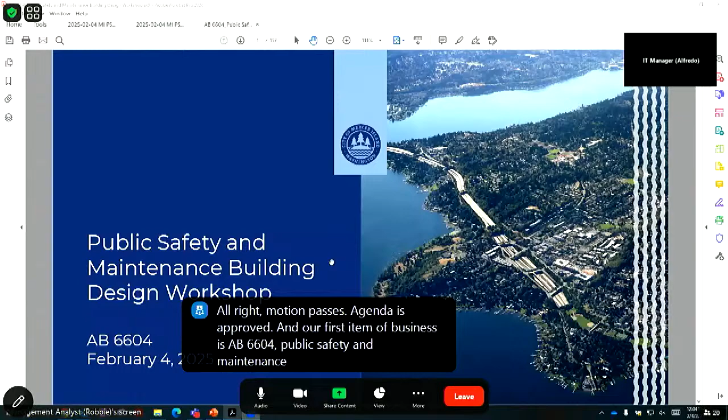Good evening, I guess good afternoon, not evening. I'm trained for council meeting hour. All right, I will ask for staff assistance in retrieving my nameplate I just dumped on the floor. Thanks, Andrea.

All right, council, it's an exciting day. We are at meeting number one discussing the public safety and maintenance facility. I'll remind you that it was just less than a year ago that you provided us direction to commence design on this facility, and here we are back at our planning session. Really excited to walk through this with you today.

I'm going to start with the background slides. Most of us have been living this intimately, including the city council, but for community members joining us today or watching this video in the future, they may not have all the history. I don't intend to go over each slide in detail, just to provide a high-level overview, but the slide deck is complete with all of the history, should anyone need it in the future.

Before I dive in, this is an interactive presentation, especially as we get into the design discussion. We'll be taking a lot of breaks. We want questions. No question is a bad question.

I'll be doing the front half of the presentation and then handing it over to our design team. I should take a moment to introduce the folks sitting here at the table. Northwest Studios is our architect team working on the public safety and maintenance facility: Aaron Young and David Cutler, who you've met previously. And to my right is Robbie Cunningham Adams, a senior management analyst in the city manager's office, and he's in charge of me and keeping the project on track. All right, shall we dive in?

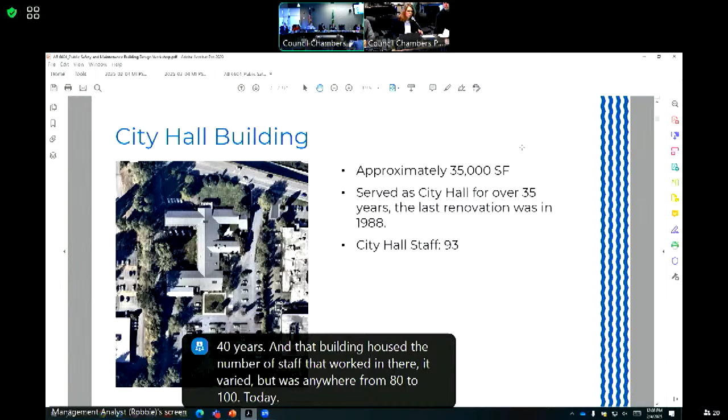The other building we'll be talking about today is the Public Works building. As a reminder, it was constructed in the early 80s for the city maintenance facilities. It's about 15,000 square feet, still in operation, and houses a variety of teams all under the umbrella of Public Works, about 64 year-round employees. During the spring and summer months, we add about 20 seasonal employees.

Over time, the city has repurposed and remodeled that building because we outgrew it pretty quickly. So for those who have toured it, you know some of the maintenance bays are office spaces now, and it isn't quite working for us for a variety of reasons.

As I started the presentation, I mentioned that we intended a nice linear phased approach to our building replacement strategies through a facility conditions assessment and a long-range plan. But it was interrupted in 2023 when we closed City Hall due to asbestos contamination.

The next set of slides are from a previous presentation. Again, I won't go through them, but I put them in the deck just for continuity.

It was in April of 2023 that we discovered some tiles that were broken in the basement of City Hall. We knew the tiles in City Hall were of the vintage that they contained asbestos. So we immediately got to work evaluating the situation and working on an abatement plan.

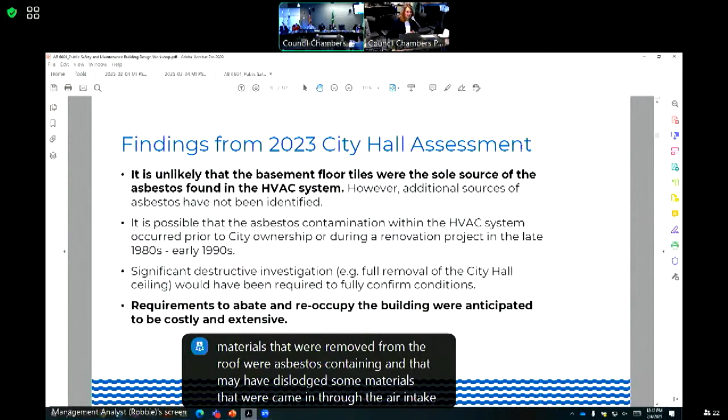That's our best guess. As you know, council, we decided not to work on this any further, although we did study it. So it's important to know when we're fielding questions about why replace City Hall.

We looked at 2 scenarios to reoccupy City Hall. The first was to abate and reoccupy the full building, and the second was to abate and just reoccupy the police wing.

When we met with you in 2023 to review these alternatives, we stopped estimating. We knew the full reoccupancy of City Hall was starting at 10 million, and it was likely going to be higher. The full HVAC system would have had to come out, ceilings replaced, electrical and more. We also looked at just reoccupying the police wing, and again the cost estimate was starting at 4 million and we thought it was probably going to go up. So we made the decision not to pursue that.

In fact, it was in October 2023 that you all directed the permanent closure of City Hall. This slide summarizes why that decision was made. It's important to remind ourselves it was not just the asbestos contamination, although that was the tipping point. City Hall is an aging facility with structural issues. It is not a resilient building that would make it through a substantial earthquake. In fact, all of the interior walls had been identified as lacking bracing, and unless reinforced, would be at risk during an earthquake. So with all of that, that was the moment we decided to move in another direction. I thank you for your leadership on that. This has not been an easy time for us, losing City Hall, but this was the right decision.

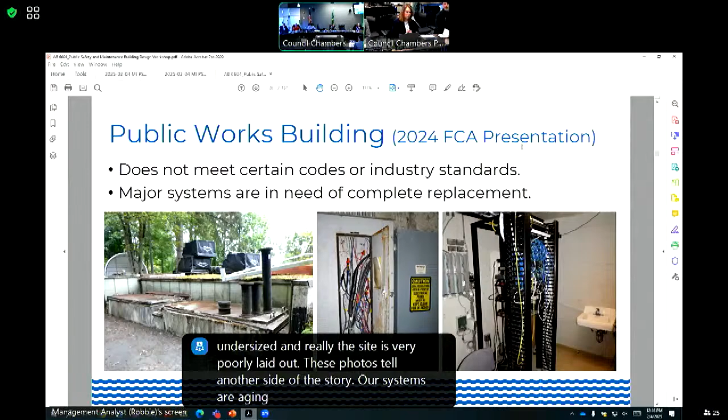These photos tell another side of the story. Our systems are aging. HVAC, electrical in this building are not up to standards, and in some cases we're not meeting code.

For those of you that have walked the site with us, I think all of you have been to the site within the last year. You know that the layout is poor, it's cramped, it's not efficient. We have a lot of major assets at this site that we use to keep our critical and essential functions running, including some pretty big rigs that we don't have anywhere to park. We'll talk more about that in a minute.

Perhaps one of the bigger problems on this building is the green roof that is leaking and compromising the structure. In fact, on your agenda tonight, we'll be asking you to approve a contract to do some of the interim work on this building. Also consistent with City Hall are the seismic risks. These are the buildings we rely on during emergencies, and neither City Hall nor Public Works were built to the standards of today. We'll talk more about a level 4 building in just a minute.

Based on these findings, it was last year, March, that we presented all of this information to you, and you directed us to prioritize the Public Works Building for replacement. So that is what brought us to today. We've combined the functions, both Public Works and Police, and a few others, to be incorporated into a new proposed public safety and maintenance facility. We love our acronyms in government, so you know we call it the PSM. We'll continue to use that.

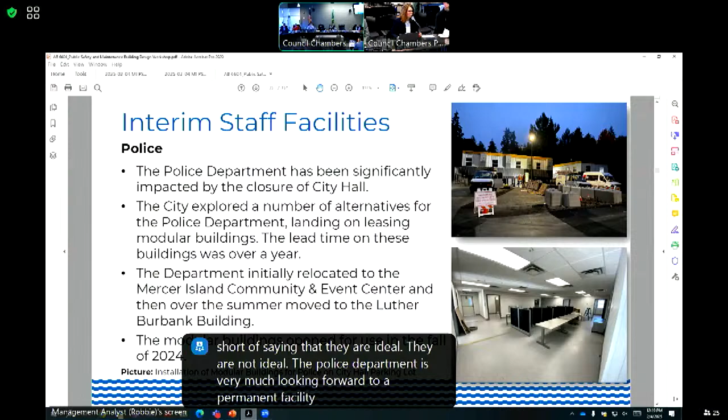Those buildings took over a year to get. They had a very long lead time, but they were fully operational for use in the fall of 2024. While these are working, I will stop short of saying that they are ideal. They are not ideal. The police department is very much looking forward to a permanent facility, and I'm sure they will all be watching our presentation today.

Municipal Court - originally when City Hall closed, we leased space in Kirkland temporarily, and then we found a more permanent location at the City of Newcastle City Hall, where we anticipate they will be for the duration. I want to thank both the City of Kirkland and the City of Newcastle for helping us out during this time.

Council chambers, I probably don't need to say much about that. We are in our council chambers now, the Slater Room at the community center. And as I mentioned a moment ago, the Public Works building - having lost City Hall, we made the decision in July to perform some interim repairs on the Public Works building so that we could extend the life for 5 to 7 years. There were, simply put, some things that could not be ignored. Your review and approval of the bid award is on the agenda for tonight's City Council meeting.

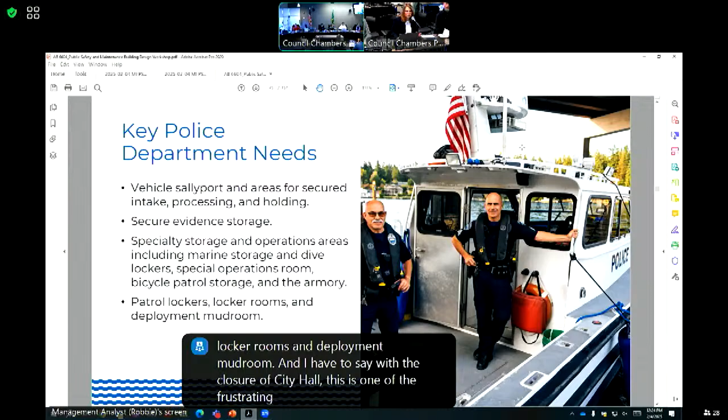Patrol lockers, locker rooms, and deployment mudroom. And I have to say, with the closure of City Hall, this is one of the most frustrating areas for police, is that the space to change and shower is not ideal.

Switching gears here to Public Works, and by the way, these are high-level summaries, I'm not providing you with every detail. Currently, in our Public Works building, we house engineering, the capital project team, parts of Parks and Recreation, our utility teams, our right-of-way teams, stormwater, support services, which includes facilities, and all of our seasonal Public Works members. In the new PSM building, we're intending to house most of that list, with the exception of engineering and capital projects. Those teams, which have more of an administrative function, may be housed in a different location.

So we're planning for workspaces and support areas for about 80 Public Works employees in the new PSM building. In the main building itself, that means offices, meeting rooms, lunch areas, conference rooms. I should heavily emphasize that. We need conference rooms and meeting rooms.

Storage, another huge need with Public Works, primarily in the yard. Similar needs for locker rooms, mud rooms, and cleanup rooms for field staff. We want them to be able to come in from the field, shower, change, and also have laundry facilities available.

Something that not everyone is aware of: at City Hall, we had spaces for people to sleep overnight. When we're responding to emergencies, even just snow and ice, our teams need to sleep here. We need them to take a break, and sometimes it makes more sense for them to do that than to travel home. We are often running 24/7 during an emergency response. So the new PSM building will include sleeping rooms for our staff that can be used for both maintenance and police.

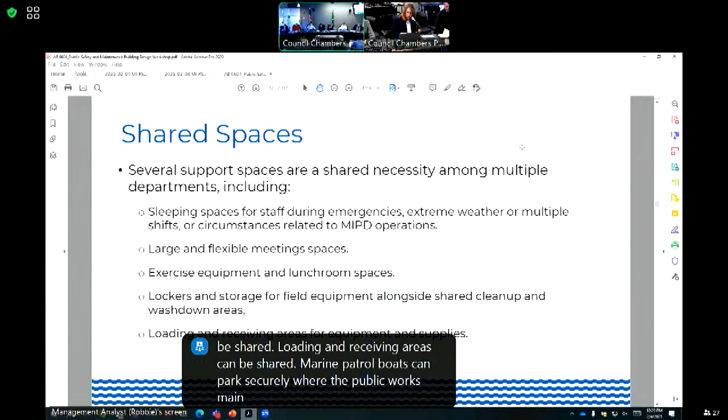Shared spaces - I'm not going to go into this in detail, we should talk about it with our Northwest Studio team in a moment. The efficiency of designing this building is identifying where Public Works and police can share spaces, though there are some circumstances where that isn't practical or efficient. Things like laundry rooms, mudrooms, locker rooms, and big kitchens can be shared. Loading and receiving areas can be shared. Marine Patrol boats can park securely where the Public Works main equipment is parked as well. So lots of opportunities for efficiencies.

I'm not going to dive into this a whole lot, we'll leave it to Northwest Studio. Just remember, we're designing this building to risk category 4, one of the most resilient, hardy ways we can build, because this building needs to be operational in the event of an earthquake. Our current facilities are level 2, maybe.

So with that, we completed all of our pre-design work in the summer of 2024, and we transitioned to what we're calling the schematic design phase, which is where we really start to put details to the plan sets, and the building and site start to take shape.

I noted here that during this process, I identified and am recommending that the customer service team be included in this building. We do not have a plan for another new building that would provide that storefront. Council, I know you've been hearing from the community asking where do we go - there's no place for someone to easily walk in and have access to all city services. So we've added a customer service counter, which was already planned for the building, but we're proposing to make it a little bigger so our customer service team can be housed here as well. There are efficiencies with doing that, because they can also serve as the main customer service desk for maintenance functions.

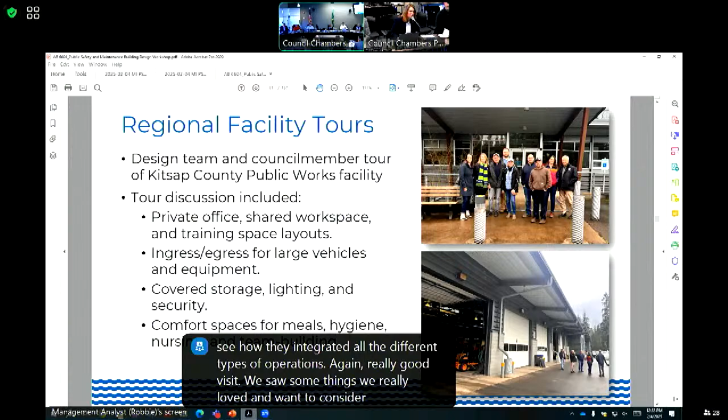Last month, we drove to Kitsap County Public Works Facility, and Councilmember Anderl and Councilmember Jacobson joined us - thank you for that. We chose that facility because first of all, it's very large, much larger than our own will be, but also many of their public works functions are housed at that facility, so we wanted to see how they integrated all the different types of operations. Again, really good visit - we saw some things we really loved and want to consider, and they gave us some lessons learned about their building.

And as I just mentioned, it might not seem obvious that we've been touring our own facility, but we've been going over the Public Works Building and City Hall campus with a fine-tooth comb and talking to the staff teams, really understanding operational flows and what's working and what's not working, and that was all incorporated into our design.

And many design meetings. As we started to see drafts of the facilities, we've been meeting again with the staff, and there will be another iteration with the staff in February and March. After today's meeting, we go back to the staff and walk through the design sets with them and get their feedback.

I guess this is just one of the final wrap-up slides here. I think it's very important for the council, the community, and the internal staff teams to know that what's being discussed today is not final. For those of you who've been involved in major construction, you know there's going to be a lot of changes along the way, not just over the next few months, but even in the next 12 to 18 months.

Next steps and timeline, I'll mention this quickly. This is our first touch with you, City Council. We're tentatively anticipating seeing you once a month, probably through June and July, as we work to finish schematic design. We do want to take this out on a roadshow. Even though most of what's in this building is internal operations, it's really important that the community understands what's proposed here, and we have an opportunity to get their feedback. That's the timeline for community engagement, March and April, and we'll be talking more with you about that.

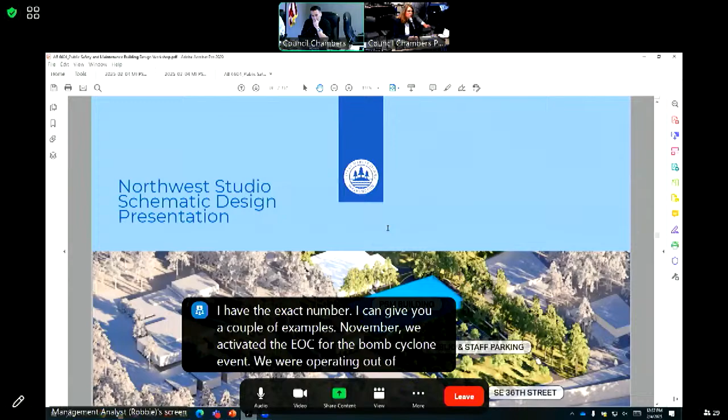November, we activated the EOC for the bomb cyclone event. We were operating out of this room for 7 days. That's the most recent. Last spring, when we were dealing with the water supply pipeline emergency, the EOC was activated. We were working here for weeks on end in that response.

Those are the two most recent major ones, but we're standing up our EOC, unfortunately, several times a year. Well, sadly, I've been here almost 8 years, and so I'm thinking back to the pandemic. The EOC was active for, was it more than a year? Yeah, and that allowed us to consolidate all of our communications, points of entry, allocate costs. So that was a pretty significant lift.

That's correct. Councilmember Wyberg. Yeah, so I'm trying to think 2 or 3 generations in the future, because the building that we construct, we want to have last for 50 to 100 years. And with the recent housing and density legislation and the expected increases in population on the island in the coming decades, was the expandability of the facility part of the design intent, like the ability to add a 3rd floor in the future, for example, or the ability to make the space larger than what it currently is, or was that a factor in the design so far?

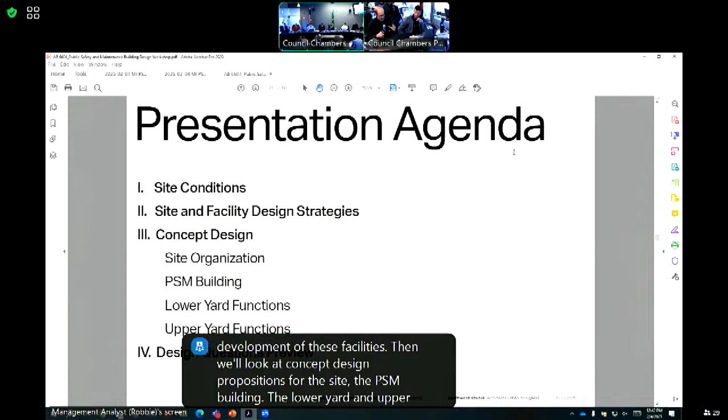We're going to talk about 4 basic categories of content today. The first is just an overview of site conditions. The second will be taking those site conditions and using them to talk about a series of site and facility design strategies that help guide us as we think about the physical development of these facilities. Then we'll look at concept design propositions for the site, the PSM building, the lower yard and upper yard functions, and those divisions will begin to make sense as we walk through the presentation. Then we have a series of questions we'd like to pose, coming out of our investigations that dovetail with potential future resiliency or environmental options.

On this current site, there are quite a lot of facilities, including the former City Hall on the north and parking for everyone coming to and operating on these sites. Currently, some of that parking has been occupied by temporary facilities for the Mercer Island Police Department.

The lower yard contains the decant facility, vehicle wash areas, raw materials, organics, and waste bins. The Public Works building itself, as Jesse mentioned, is now really full with staff offices and former maintenance shop areas and bays.

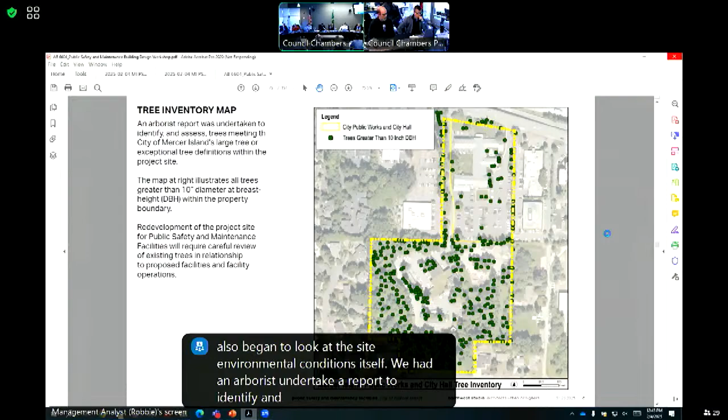As we started studying this, we also began to look at the site environmental conditions. We had an arborist undertake a report to identify and assess trees on the site, and this map illustrates all trees greater than 10-inch diameter at breast height within the property boundary. As we step forward, we'll require a careful review of these existing trees in relationship to any proposed facilities on the site.

Sorry, having a little delay here.

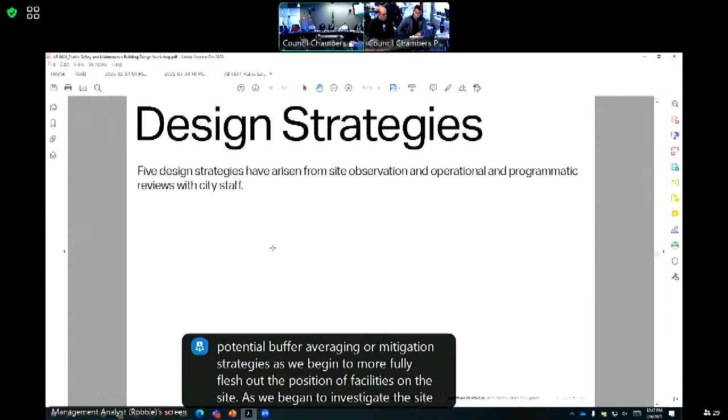As we began to investigate the site with city staff, 5 design strategies emerged from the site observations and from operational and programmatic reviews with city staff.

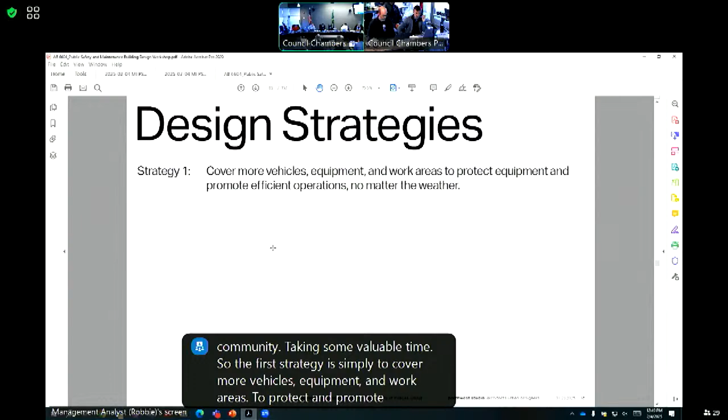Now, just as a recap, the existing public works yard, including these vehicles, are mostly uncovered and unprotected. New areas should be covered so that we can protect those assets and promote efficient operations. But that covering also begins to double as roof structure so that we can organize new facilities for efficient flow between interior and exterior operational areas.

Which leads us to the second strategy, which is co-locating buildings with covered areas for operational efficiency and cost effectiveness, leveraging that weathering cover for building roof structures and to promote efficiency indoors and outdoors.

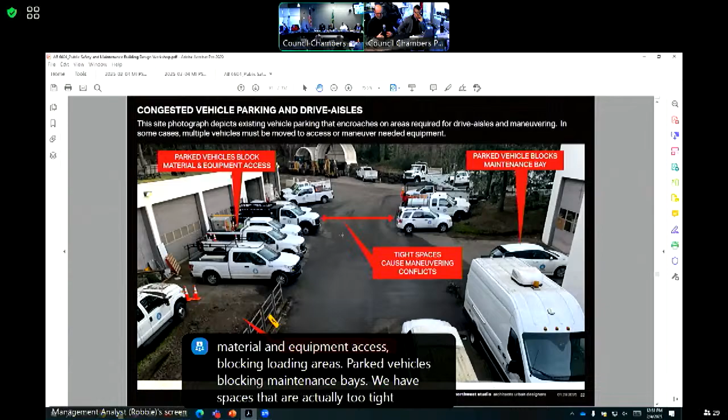If we look at a photograph of those conditions taken from the roof of the Public Works warehouse, what we can see is a really congested condition with vehicle parking and drive aisles kind of blocked. We have parked vehicles blocking material and equipment access, blocking loading areas, parked vehicles blocking maintenance bays. We have spaces that are actually too tight for maneuverability and turnaround for ingress and egress. So oftentimes a vehicle has to be moved before other vehicles can simply be used.

That, paired with the existing two-way circulation, creates quite a number of conflicts throughout the site. The two-way circulation with the ad hoc vehicle parking and the access requirements to stored equipment results in these conflicts which impact daily operations and take time when maneuvering in and out of the site.

I think it's important to return to one of the questions that was posed about the volume of operations daily, and it's important to note that the majority of the Public Works field staff are really in and out with vehicles about 3 times a day, once in the morning, once at lunch, and once in the afternoon. Have 60 to 80 people all maneuvering in vehicles around each other to try to get in and out to operations.

Simplifying vehicular circulation could be one step that helps. And one way to do that is looking towards one-way circulation rather than two-way. Nowhere is this efficiency better seen than in comparing intersections.

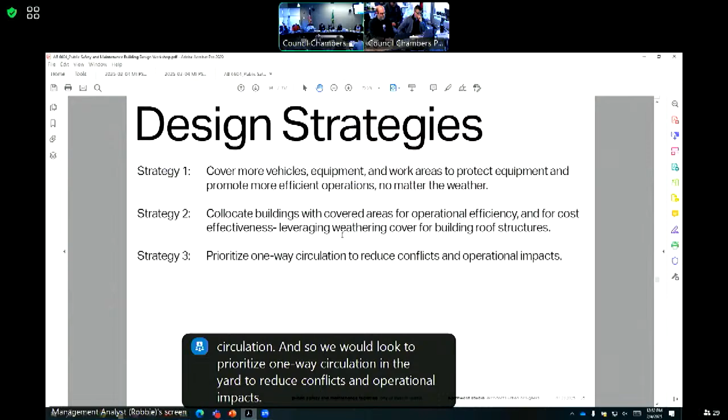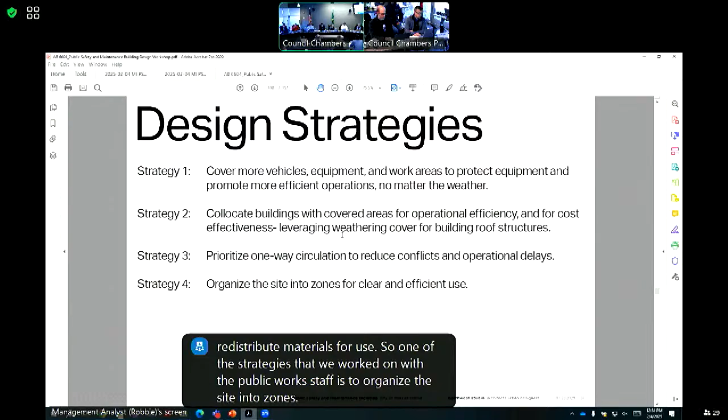Now, the Public Safety and Maintenance Facilities Program includes, we said 5 critical departments, but there are really 4 groups: the Mercer Island Police Department, the Emergency Operations Center, Public Works, and IT and GIS departments, and customer service functions. These departments have requirements that overlap and offer opportunities for shared facilities to maximize functionality and minimize the square footages required to help reduce costs of the facilities.

So organizing the PSM building, just like the yard, into functional zones so that we can dovetail with overall site design strategies and organize these building uses into clear relationships with one another, to the public access and to the yard to the south.

So the final strategy that we looked at was organizing the buildings as well as the yard into zones that maximize the use of shared spaces and promote efficient operations for staff and create clearly accessible spaces for public services.

All right, I think we'll pause there and see if there's any questions on existing conditions or the design strategies.

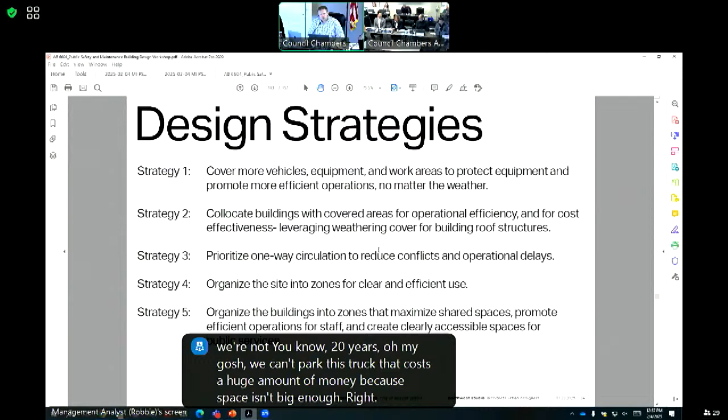Right, Jason, are you on? Actually, do you mind stopping screen sharing right now? Hi Jason, Jason is home in sick land. Thank you for joining us. Jason, can you talk a little bit about the future of our fleet, what's known and what's not known?

In terms of our fleet size, the size of the equipment itself, I don't anticipate getting larger. The size that we have is given the physical constraints of the island, the topography, and some of the challenges we have with the location of our utilities. Larger vehicles don't actually help us in a lot of ways because of the challenges we have to face with our existing conditions on the island. So that said, the trucks that we have are probably about as large as we anticipate getting, because we're not going to add to the size of our city.

We're not going to annex in elsewhere and things like that, so I'm confident in saying the size of the equipment we have suits our needs. I could anticipate it getting smaller or more compact. You could add other elements like trailers, but that wouldn't necessarily impact the height requirement of the vehicles. There's also WSDOT standards and requirements in terms of the size of vehicles and limitations associated to it, which this design team is taking into consideration. So I don't anticipate those changing over the course of the next 20 or 30 years. As far as our fleet goes, I think we're at the max size vehicles we have, and ideally we'd probably get a little smaller in some vehicles if possible.

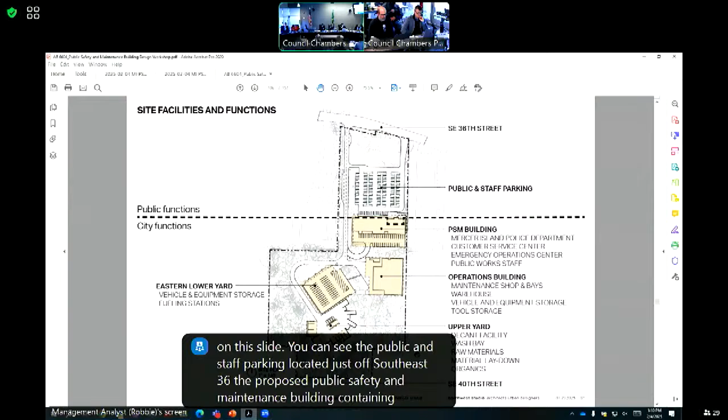You can see the public and staff parking located just off Southeast 36th, and the proposed public safety and maintenance building containing the Mercer Island Police Department, Customer Service Center, Emergency Operations Center, and Public Works staff, along with the secure functions for the MIPD.

Just south of that is what we're calling the operations building, which has the maintenance shop and bays, warehouse, primary location for equipment and tool storage, along with covered, enclosed, and heated vehicle storage. Across the stream is what we're calling the eastern lower yard, primarily covered but open vehicle and equipment storage, along with fueling stations for diesel, unleaded, and propane.

And then just to the south of that, up the hill, is the upper yard, which would locate the decant facility, a wash bay, raw material storage, material laydown, and organics and waste.

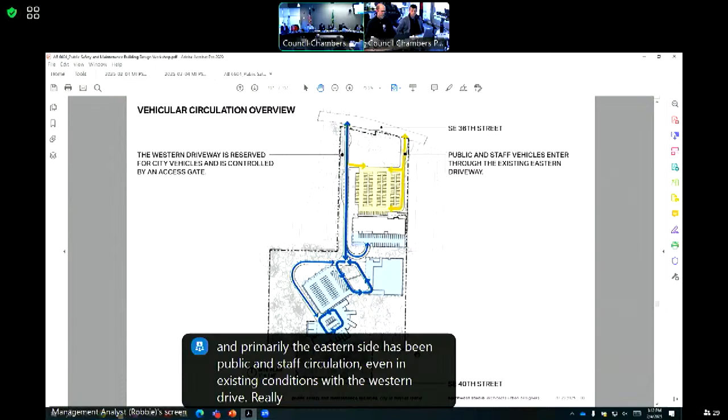Now, vehicular circulation, which we touched on in the site conditions, is a particular item to pay attention to. The current site has two ways in and out along Southeast 36th, and primarily the eastern side has been public and staff circulation, even in existing conditions, with the western drive really dedicated for city vehicles. We propose maintaining that and dedicating and reserving those for each of those functions, and I'm going to walk through that.

For public and staff vehicle circulation, on the eastern side of the site is the primary entrance to arrive at a public parking lot with clear access to the PSM building and customer service entries. This parking lot includes approximately 120 spaces, with the balance of code-required parking located elsewhere on the site.

The western driveway, though it's reserved for city vehicles, is controlled by an access gate just south of the arrow that turns right there. A diversion lane is located on the inbound lane, because if you're like me, you're going to go in that driveway on accident, and you're going to need a way to get to the public parking lot without having to back up or interrupt public works operations.

City vehicle circulation would ingress and egress on the western side, on the Southeast 36th Street driveway. This is a two-way drive aisle that guides vehicles from Southeast 36 into the project site. That drive aisle is anticipated to have an inbound lay-by lane to assist Public Works in managing potential queuing during high-volume times for deliveries or vehicle traffic.

As you can see in this diagram, once onto the Public Works yard, circulation moves in a one-way loop used to manage circulation between the eastern and western halves of that lower yard, with two-way circulation to the upper yard, again operating on a one-way loop. We'll look at that in more detail as we zoom into each of the plans later in the presentation.

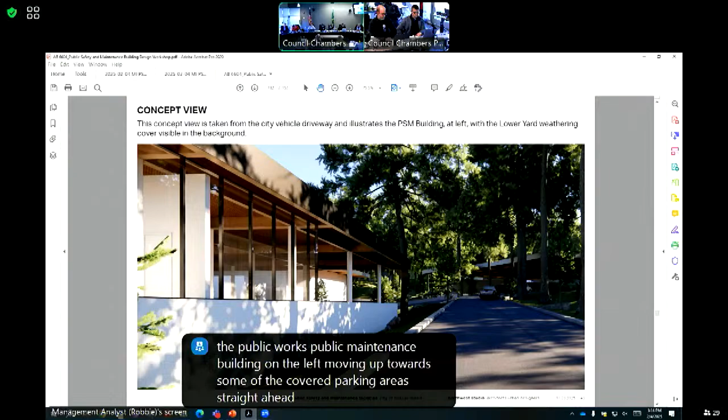The Public Safety and Maintenance Building has a pretty diverse program. It occupies, as currently planned, about 36,000 gross square feet on 2 floors. These include the Mercer Island Police Department, which occupies about 16,600 gross square feet, and the Emergency Operations Center, which utilizes about 5,600 gross square feet.

Public Works, IT, and GIS combine for about 10,000 gross square feet. Customer service, public counters, and staff areas are about 6,300 square feet. And a very large group of shared spaces is about 12,000 square feet. Now, if you're doing the math, you'll note that that adds up to way more than 36,000 square feet. It adds up to more than that because we've been able to work with all of the groups to plan the overlap in a lot of spaces, how they can share these spaces to reduce the size of the overall building. We'll walk through that as we go through the plans.

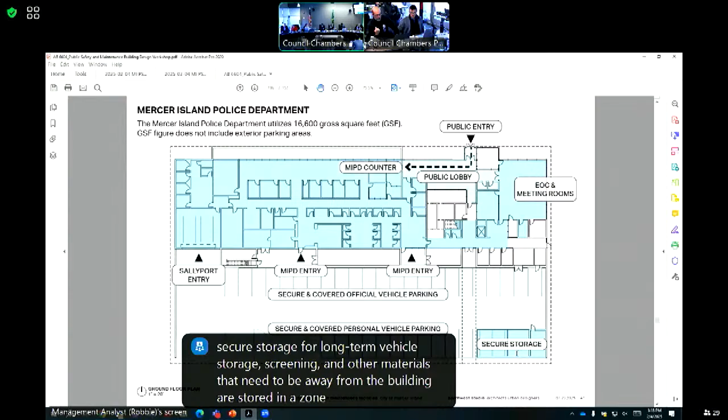The bulk of MIPD staff dedicated entries are on the southern side off of the secure and covered vehicle parking areas, with Sallyport entries on the west and staff and pedestrian entries on the middle and to the east. Other secure storage for long-term vehicle storage, screening, and other materials that need to be away from the building are stored in a zone on the southeastern corner of this building.

Looking at the Emergency Operations Center, you can begin to see some of the overlap. The primary EOC room is located on the northeast corner of the building, right off of the public lobby. We'll look at the other functions for that room in a moment, but it is surrounded by small conference, large conference rooms, call centers, storage areas, support stations, ham radio facilities, and staff entries and secure entries at various points around the building to promote an efficient flow of operations.

The customer service center and city staff areas utilize many of the same spaces because though the EOC sees a lot of use, it is not in operation all the time, hopefully increasingly less. That room becomes available for staff meetings, potential training, volunteer training related to EOC activities, and other operations for the customer service center.

The shared workspaces on this floor really overlap with a lot of these same areas, with EOC doubling as meeting and training rooms, small and large conference areas being used by city staff and MIPD throughout the building, storage areas for all of that staff, workrooms, and vertical circulation.

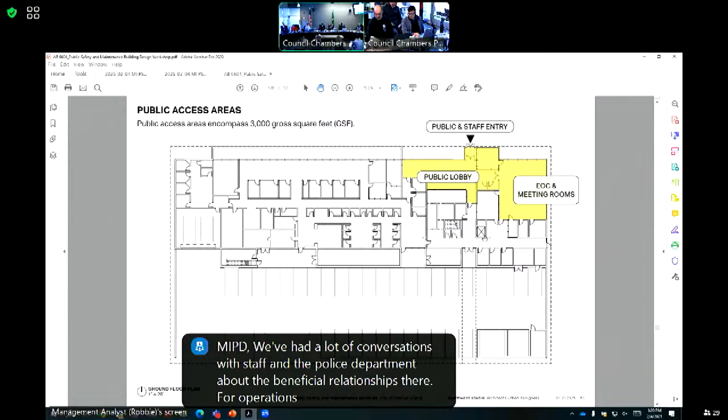One final diagram illustrates the public access areas of the building, from the public entry on the north through to a small conference room, the EOC room for potential volunteer training or other activities, and the public lobby itself, which is shared between customer service and MIPD. We've had a lot of conversations with staff and the police department about the beneficial relationships there for operations, and a public lobby that's also big enough to host necessary computer stations and work tables that would enable staff to have small meetings with applicants for questions.

As we move up to the second floor, we can see that this floor is primarily occupied by offices and collaboration spaces on the western side, with shared workplace facilities located directly above the central stair, an elevator, and vertical circulation in the building.

This floor is connected by a walkway across the parking area below to the Public Works yard to the south. The second floor of this building is approximately at the same grade elevation as the Public Works operations building to the south, so this enables Public Works staff to walk directly out of the building and move over towards the Public Works yard.

That western third, or two-thirds of the building, is really being occupied by open offices and collaboration spaces primarily, with select private offices and enclosed meeting spaces occupying the middle of the building, with IT, GIS, server rooms, storage, and supply rooms located to the east.

Primary staff entry to and from the Public Works yard is located around the shared workspaces. That staff entry is located with meetings, lunch, and break areas really occupying the middle of the shared workspace zone, with the eastern side of the building occupied by the nuts and bolts of the shared workspaces, which are the equipment lockers, sleep rooms, cleanup spaces, mud rooms, laundry, restrooms, changing rooms, showers, all the things that Public Works staff need to operate on a daily basis with the equipment.

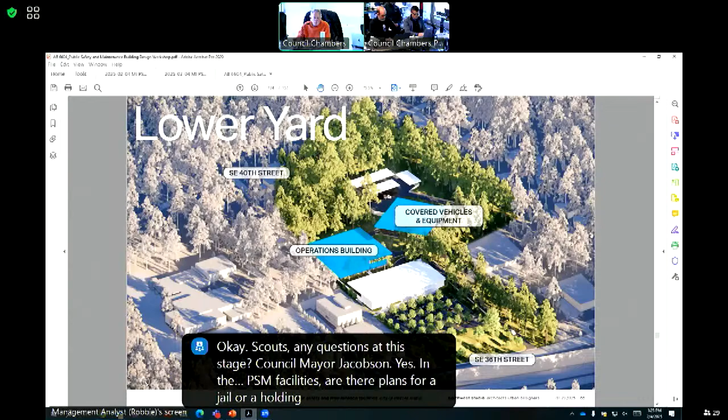Councilmember Jacobson. Yes, in the PSM facility, are there plans for a jail or a holding area? Let's maybe flip back, we don't have all the spaces labeled here.

There we go. And the chief is here too. So Chief, if you want to kick Robbie out of his seat, or Robbie, I'll bring you the mic. So I can have Aaron show, we can have the chief talk about how we handle in-custody flow through the Sally Port.

Northwest Studios, do you want to point out where the holding cells are right now? The holding cells and processing are located in the northwestern corner of the building, where my cursor is currently, with the Sally Port located directly to the south of that. And Chief, did you want to say anything about how that is intended to function together?

Sure. The purpose of the holding cells is really just temporary, to process an in-custody arrest, possibly photograph, fingerprint, DUI processing, et cetera, or further interviews. So persons would be brought through the Sally Port, which is a secure entry point, into the top left corner area, which would be a series of secure holding cell rooms and a hard interview room where detectives or officers could interview those persons as needed. And then when we're done processing, they're transported to whatever jail we're housing them at.

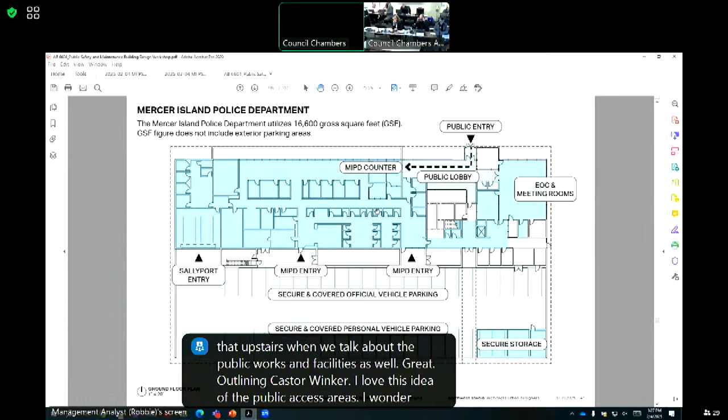Great. Councilmember Weiker. I love this idea of the public access areas. So I wonder if you could speak a little more to, A, how flexible that space is, and B, how important it is for any number of reasons we would need that space going forward. I think that's a fantastic addition.

So, good question. I think you've gleaned from the presentation this is largely an internal operations facility, and the security of the building and the yard and the vehicles is of utmost importance. But it is a public facility, and allowing it to be used in some ways for community use, I also think is very important.

The EOC space, we moved it to the front of the building, and the EOC will be built so that in a moment's notice, we can all arrive, pull out our equipment and supplies, and be ready to go. It will likely not be set up as an EOC permanently because we don't need to use it all the time. However, if Amanda Cavercamp was here, she would say, Jesse, wait a minute, I need to use it for trainings, and that's exactly what it's intended to be: flexible.

So we'll be using it for volunteer training. We would also likely make it available for community use, with the understanding that if you book here, we may have to bump you out if we have an emergency. But that is all going to be designed so that you can come into the EOC. There's restroom facilities, and I won't call it a kitchen, but some limited refreshment stations, so that a community group could be here, have access to those facilities, and not have access to the rest of the building.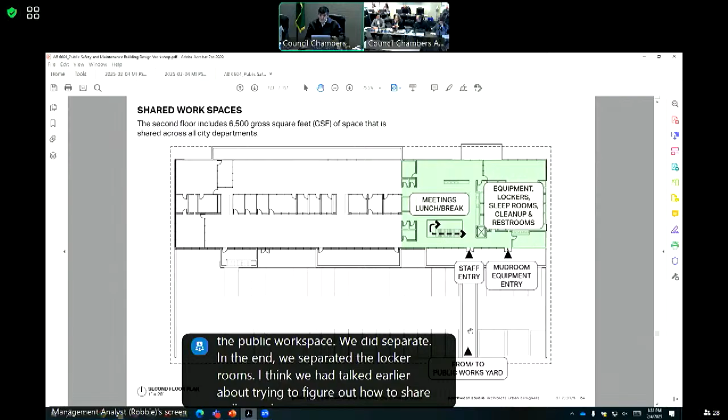We did separate, in the end, the locker rooms. I think we had talked earlier about trying to figure out how to share police and Public Works. There's some practical challenges with that, particularly our officers having to remove and securely handle things like gun belts. So for right now, that's split, but what's shared here is the sleeping rooms. So if for some reason one of our police personnel needed to spend the night in the building, that is a shared space. I hope that covered it.

Yeah, so I think you guys covered it. The source of the question, I guess, when people are coming across from the Public Works yard and into a mudroom, I presume that means there'll still be some debris that needs to be cleared off, which means there's going to be some of it getting on that bridge.

And when we clear off that bridge, it's going to be, unless we have nice drainage around there collecting that, dripping down onto the police vehicles. So I'm just trying to make sure that we're thinking about the Z factor and what's underneath there.

That's a great comment. I will say the finishes on the building, we're far from that, but this building is designed to be very utility in nature. We know particularly the Public Works crew, with all due respect to them, are messy and they're coming from the field. We want to make sure we can clean up easily. So this type of carpeting will probably not be found in very many places in the building.

Okay, thank you. Deputy Mayor Rosenbaum.

My question was about how the police segment was designed in terms of, was it a comparison to other facilities or to similar size? But it sounds like that there's more to come on that after the next touch, so maybe I'll just check back in a few weeks.

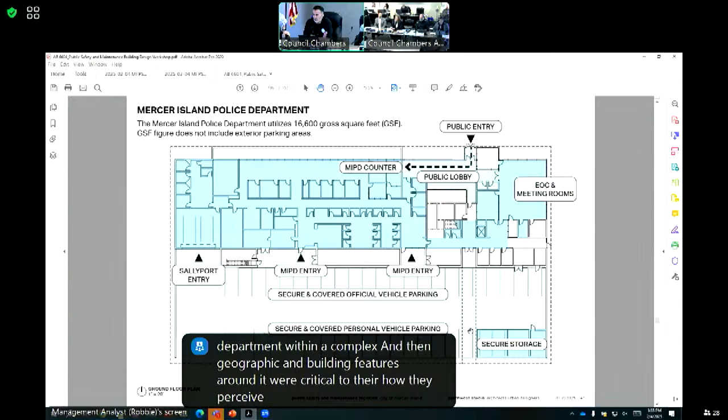Wasn't planning to break down where all the staff will be housed today, but that is on my list for a future presentation, so we have an understanding of that. I will say that, in talking to a lot of the police personnel and the other departments on the tours, placement of the police department within a complex, and then geographic and building features around it were critical to how they perceive their space, their personal safety operating in and out of that space. And it looks like, from a site design perspective, you've chosen really an optimal placement. The ingress and egress looks ideal. And I would love to hear from our officers how they would feel about that placement in terms of their professional comfort working in it.

Anybody else? Yeah, Councilmember Jacobson.

You mentioned the square footage of 19,000 square feet. Is that the entire structure we're seeing on this drawing, including the parking? That's not including the parking, that's the enclosed heated envelope of the first floor, including all mechanical, electrical equipment rooms and storage rooms. So then we'd be just under 40,000 feet, if I'm understanding your math. With the second floor included, it's about 36,000 square feet. The second floor is slightly smaller.

Another question, if I can be indulged, Mr. Mayor. Will the structural design of this facility provide for expansion over the parking area if that is necessary at some future point?

That's a good question, we've been talking a lot about parking. Towards the end of this presentation, we have a couple of questions to pose to this group for further study. One relates to structures, and the other relates to the possibility of additional parking zones with building above, so we'd like to daylight that with you. At this early stage, we'll take your question for further study, but we haven't yet looked at the structure in enough detail to identify areas where you could build above.

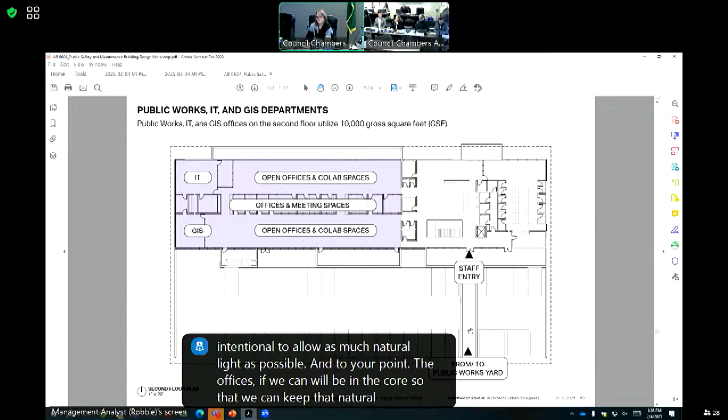Councilmember Weiker: final comment, I love that you put the offices in the middle of each floor, so that leaves some flexibility and a lot of light coming in. The shape of the building, the longer linear form, was intentional to allow as much natural light as possible. The offices will be in the core so we can keep that natural light coming in. We all worked in a very dark city hall with not much natural light.

Okay, not seeing anything else. Would you like to take a break now or keep going? Keep going, this is cool. All right, looks like you.

The next area we'll talk about is the lower yard, just south of the PSM building we've discussed. This is broken into two halves around the creek we looked at earlier on the maps: the operations building on the eastern half, and the covered vehicles and equipment on the western half. Although it's really just two simple structures, an operations building and a covered area, it has quite a complex program.

The operations building, approximately 33,000 gross square feet inclusive of a mezzanine, includes enclosed and heated vehicle storage for select vehicles, a warehouse for material, equipment and tool storage, the maintenance shop and maintenance bays including space for Parks Department maintenance areas, loading and operations, temporary parking, loading areas and zones, staff areas, storage for emergency operations, and waste collection.

The covered vehicle and equipment storage on the opposite side of the creek includes parking and storage for approximately 60 pieces of equipment and vehicles, including oversized vehicles and trailers, and fueling stations for unleaded gasoline, diesel, and propane.

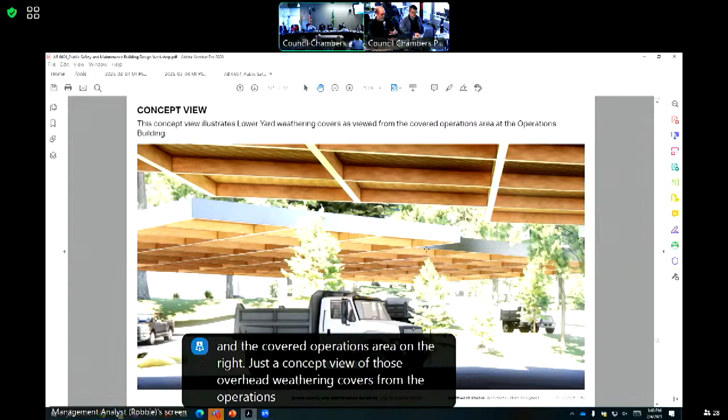This diagram illustrates the basic programmatic operation of this single-story high bay operations building. High bay means a bottom of structure height of anywhere from 27 to 30 feet, so we can clear larger vehicles lifted up on maintenance lifts or overhead gantries to erect equipment on top of some vehicles, with warehouse and storage areas below and mezzanines for systems and storage above.

Looking at the plans, the ground floor of this building hosts a diverse program. From that central loop, ingress into the building is through a vehicle entry, with a series of staff entries and man doors as well, including a vehicle entry on the southern side of the site.

Inside, you can see primarily parking for oversized vehicles and equipment on the right-hand side, with maintenance bays of the same size just north of that, culminating in the shop, office, and staff day rooms to the north. On the western side, there's additional parking for vehicles and equipment that need to be stored indoors or loaded from tool storage at the warehouse, with a vehicle exit from the north taking you straight out to that one-way circulation loop and access drive.

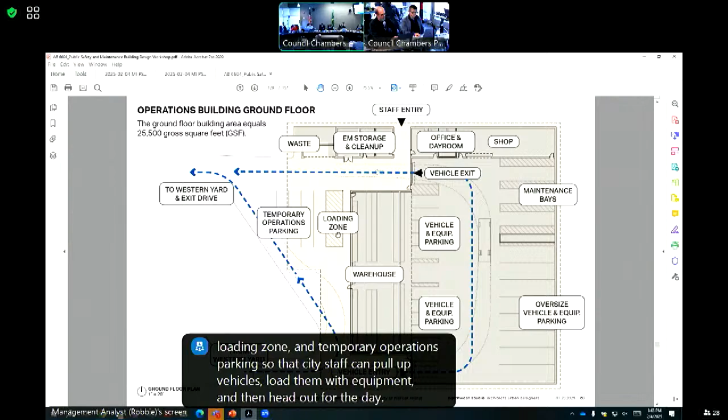Pre-rinse and cleanup occur in this small detached building with emergency operations storage located adjacent to that, and waste bins for organics, recycling, and general waste available. This is the only area where a vehicle will be required to back up to pull in one way and back up to load and unload waste or emergency operations items.

Above this floor, there is a mezzanine that's approximately 7,500 gross square feet. We take advantage of the fact that this is a high bay structure to utilize an upper level to the warehouse, so we really double the available storage for the warehouse, and then organize building systems, mechanical, HVAC, and plumbing in a mezzanine just to the north.

As we look, the next piece of the project is really that upper yard. So driving from that one-way loop up on a two-way route up the hill, from the lower yard to the upper yard, what we find is another one-way loop that provides head-in and backup access to a decant facility, areas dedicated for material laydown, raw materials, organics and waste around the perimeter, with a wash bay located in the middle and waste bins located just to the side of that.

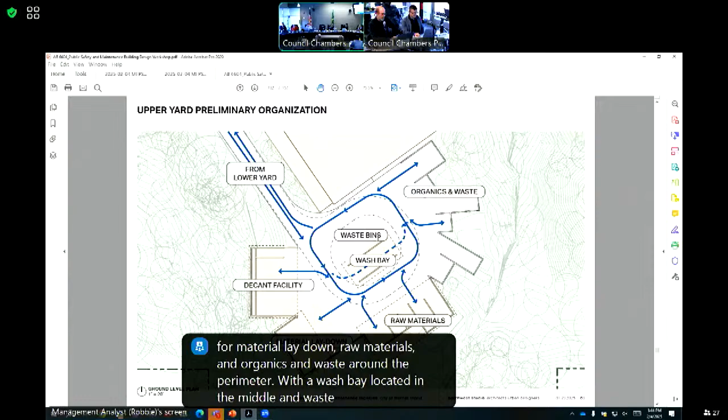Now, I will say we've labeled this as preliminary organization because the vehicle maneuvers here are quite complex. They're very large vehicles, sometimes working in tandem with backhoes and other lifts. So we're still in the very early planning stages of all of this, and I expect this to change quite a lot as we continue to work through with operations staff. But this does represent the programmatic components of the proposed areas in the upper yard.

So before we jump into design questions for discussion, I thought we should answer any questions you have about the yard. Okay, Councilor Jacobson. Yeah, could you go back one or two slides to this one right here?

We may not have enough stuff to justify it, but I've noticed that a lot of warehouses now are using robots rather than people, or for large stuff, forklifts and things. I don't know if robots require more room than forklifts or something else, but is that whole subject of where the industry is going, or where warehousing is going, something you guys are looking at?

I think that's a very good note to us to pay attention to the trajectory of warehouse storage operations so that we can understand any big structural constraints, like the height of that mezzanine, so we can allow for that as it's evolving. From my tours of the existing facilities, one of the sore points for Public Works—Jason will correct me if I'm wrong—is the difficulty in getting at stuff, let alone not having enough room for it, having to move this to get at that, which is inefficient, but also doesn't permit us to store larger volumes of stuff, which we might want to do if we're going to self-perform maintenance or something of that sort.

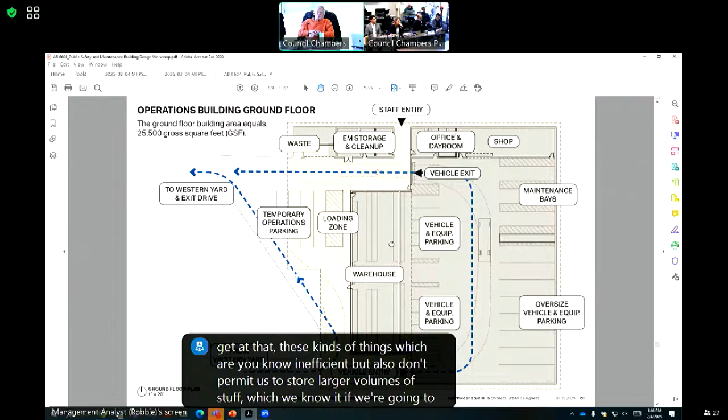It's a great question. I think the other thing for the ops team and our design team to work on is what's the right capacity for our warehouse. We have a fairly large warehouse facility now, and our storage has evolved. We can get things a lot more quickly, so we don't need to stockpile, except when we have an emergency, then we need to have a stockpile. So Jason and Elaine are here, and they're thinking through with the design team how we right-size this. I think the robotics question, especially learning about how Amazon warehouses are operating now, is a valid point. Thank you for sharing that.

Along those lines, one other thought might be that at the present time, there wouldn't be access, as I see in your drawing here, from the west side or the exterior of the building for the warehouse.

I have no idea whether one of those kinds of things would facilitate offloading whatever stuff Public Works wants to rat hole in its deal, but that's another thing you might want to look at, or talk to those people. My understanding from talking to the people over at Kitsap is that's not optimal for a variety of reasons over there, and if the world were perfect, they'd have a more discrete ability to stock and destock stuff.

That's a good point, and just to clarify, there is loading and unloading access both on the ground floor and mezzanine level from the western side, as well as from the eastern side inside the building. So we'd like to come at that from two ways, just to your point exactly.

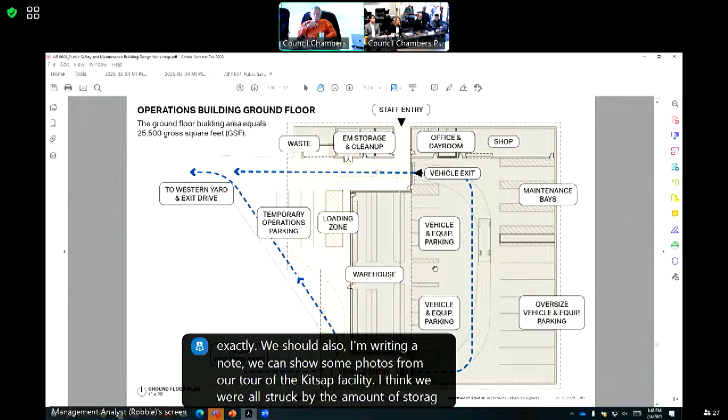Got it, thanks. We should also show some photos from our tour of the Kitsap facility. I think we were all struck by the amount of storage they had. But Councilmember Jacobson is right, in some ways it was like a college dorm room because they couldn't get to it and they were tripping over it. So they had a lot of space, but the access was tricky.

Councilmember Weiker: I'll just say, I love the maintenance bay ideas, because there's the maintenance you plan for, and then the maintenance that comes up as you're doing your operation. So giving our team that flexibility is really appreciated. Thank you for that.

Councilmember Weinberg: So in the covered vehicle equipment and storage area, I presume our largest vehicle currently is the vac truck in terms of both height and length? Or is one of the Marine Patrol boats, when it's on a trailer, actually taller? Probably have to double check with Jason. I think the vac trucks are the tallest. No, you're right, the vac trucks are the biggest that we have.

Okay, and I know that the Marine Patrol boats, there are some of them that we are looking to replace with a next generation. Are there some boats we are looking at that would actually be larger? And are these spaces designed to be able to accommodate a future generation of watercraft?

That's a good question. We're actually in the process of replacing Marine Patrol vessels, so I'll put on our list to talk with the chief and our police personnel about future planning for boat height. I will say, in an earlier version of these plans that you did not see, we were trying to get the Marine Patrol boats into the parking lot behind the PSM building to keep all the police vehicles together. It just does not work to trailer in.

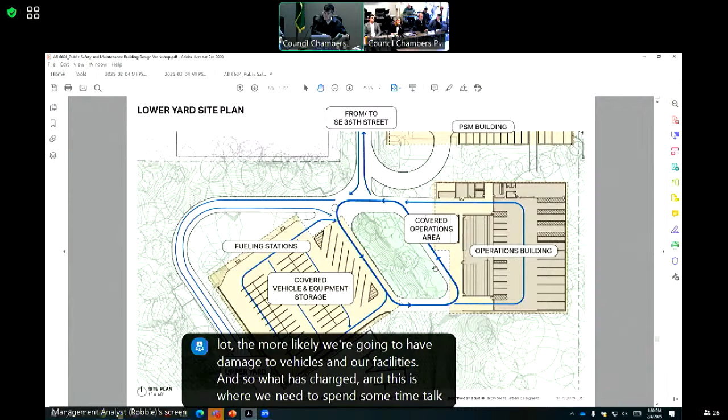One of the things we learned from our site tours is the more backing and maneuvering in that police parking lot, the more likely we're going to have damage to vehicles and our facilities. So what has changed, and this is where we need to spend time talking with the police department staff and our design team, is the boats, when they're on trailers and parked, are now intended to be in the backyard with the other big pieces of equipment we own. So again, that's on our list to talk with police about, but it's just not practical to get trailers into that police parking lot. Good question about the boats.

One point of clarification on that covered vehicle and equipment storage area: that covering is anticipated to be at the level of high bay as well, so 25 to 30 feet to the underside of the structure, exceeding all of the state WSDOT requirements for highway clearances.

Councilmember Reynolds: Naive question here, but I don't know the depth of those spaces — do you allow for a boat and a truck so that there's room to back it up, or use a forklift to turn it around once it's in the building to pull it into the spot? In this configuration, once a truck with a trailer moves into a spot, the trailer is detached and the truck moves on to parking. But is there room to do the three-point turn or whatever to back it up?

Well, the nice thing about this being one-way circulation is that we're actually moving in one direction, pulling right into that stall, and the truck can move out in a one-way direction and continue on. So we're not requiring any backup movements to perform that activity. In fact, we were trying to avoid backup maneuvers where we can through this design. That's part of what we'll have to exercise with both police and public works to see if we've achieved it, or where we need to problem solve further.

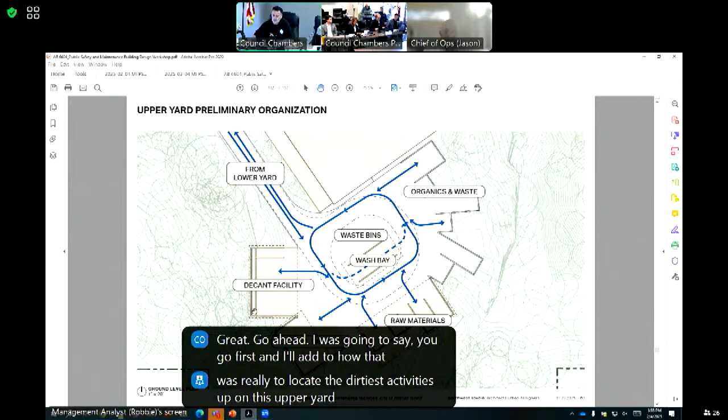One of the strategies that comes all the way back to the site planning was to locate the dirtiest activities up on this upper yard, where they're concealed and screened. There's a lot of material spread out up here, as you've probably seen in your walk around the lower yard, from organics, waste, and raw materials. A contemporary wash bay would have side walls, in some cases end closures. We'll work with Public Works staff to know what works best for them, so that the clean-off and spray isn't migrating through the air to other places, but is captured in that specific zone and able to be filtered.

So large amounts of dirt and mud, all manageable by the system? That's correct. I'll add that this facility in particular is tied to our NPDES program and our sanitary sewer system, so it's part of our ongoing routine maintenance, both inspections and ongoing clean-out. It's something we already currently do.

And the high pressure systems, are they electric, gas, hot, cold? They come in all shapes and sizes, and in fact some are still manually operated, and some are automated with separate manual options to clean out the beds of trucks. One of the things going forward will be to understand which type works best for current Public Works needs and uses, so we can right-size this facility to match that equipment, and that equipment does change, like all technology.

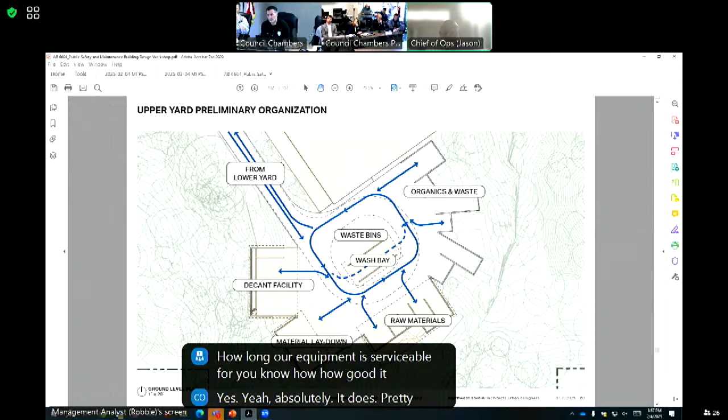Jason, maybe you could add some character around the ability to clean equipment quickly and efficiently at a low cost related to the equipment's lifespan. Does that increase how long our equipment is serviceable, how well we take care of it? Yeah, absolutely it does. It's a pretty quick cleaning setup for us to do, and it's important to prolong the expected useful life of that equipment — that's the goal behind it.

Talk about your street sweeper — we don't want debris sitting inside that sweeper.

Especially when it's sitting over long periods of time, that tends to rust out the inside of that sweeper quicker, deteriorate quicker. Same thing on the sanitary sewer side. Same thing with mowers. If the mower decks aren't being cleaned after use, it tends to rust out the decks and blades quicker. So it lessens the lifespan of the equipment if we're not maintaining it. This is an important element of any public works facility.

And remind me, what is the sweeper cost these days? 300,000 plus for a standard model, and if you want to go to the alternative fuel technology, you're looking at 1.5 to 2 times that cost. Perfect, thank you. All right, anybody else?

All right, we'll move on. So this next set is the first set of design questions we have for the council. I imagine every time we see you, we will have another list of things we'd like to talk about. Just to set the table here, we're not looking for a design decision today, but to illustrate the types of questions we'll have to answer, and really to get a sense from you of, on this list of I think 7 items, what are rising to the top for further study so that we can come back and share more information, and maybe what's not as appealing at this time. So, Aaron, go ahead.

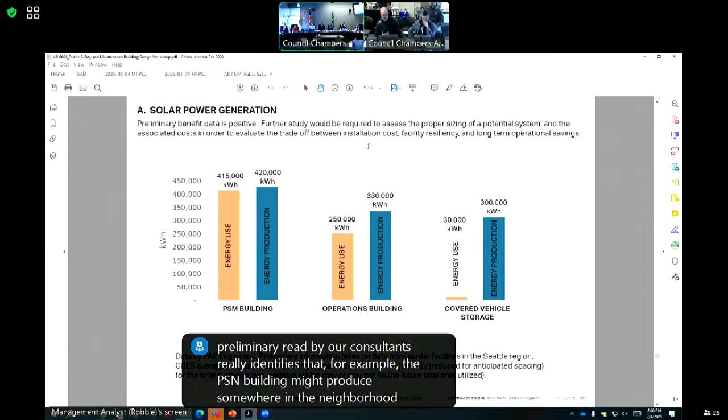With some down factoring for efficiency and other pieces of equipment that would need to be on those roofs, the preliminary read by our consultants really identifies that, for example, the PSM building might produce somewhere in the neighborhood of 420,000 kilowatt hours, while its energy use based on all the uses in the building would really be something like 415,000 kilowatt hours on an annual basis. Now, we haven't gotten to the granularity of tracking these month by month. We know in this region that can vary quite a lot. But the operations building, likewise a little less energy intensive, with 250,000 kilowatt hours of predicted energy use and about 330,000 kilowatt hours of possible energy generation.

And the covered vehicle and storage, quite a wide discrepancy, right? Very low energy use, 30,000 kilowatt hours, with 10 times that in energy production. Now, these figures do not yet account for fleet electrification, but they do reflect the potential balance that would be available to provide power for fleet electrification or other opportunities. As we looked at this with our consultants, we felt that this might be a good candidate to step forward so that we could evaluate for you the trade-offs between installation cost, facility resiliency, and long-term operational savings for further consideration.

Okay, council, any questions about that? Councilmember Anderl. Thanks. Yeah, I have a lot of questions about this, and I don't expect you to answer some, all, or any of them today, but as we go down the road, my curiosity is on the all-in costs of this system versus the all-in benefit. And when I say that, I mean cost of the solar panels, cost to install, cost to maintain, cost for batteries, cost to dispose of, cost to replace, what the expected life expectancy is. I'm saying this fast because you're nodding, so these are all things that you have on your punch list.

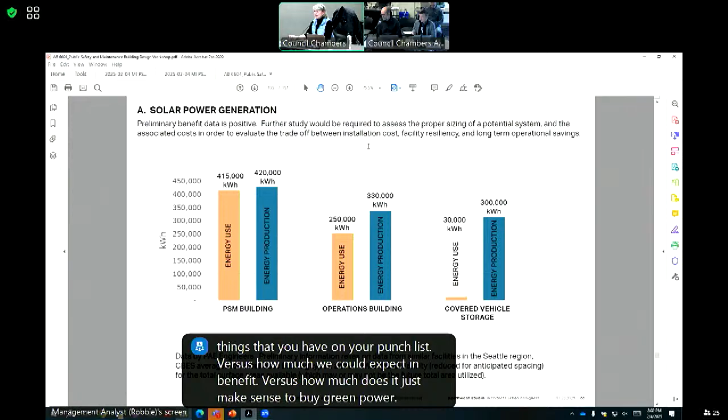Versus how much we could expect in benefit, versus how much does it just make sense to buy green power, and whether there are any potential negative implications in terms of stability of the roof with the installation of the solar panels. I don't want another leaky roof, not just in my lifetime, but in this decade, or in this century. So those kinds of things are all really important. If the math and the calculus proves out, I'll be all thumbs up on it, but otherwise I'd be hesitant to say do this because it sounds cool that we have solar power in the city's fleet. The other thing is, then, if you are going to look at this and can calculate, is there a shortened life for the solar facilities if we add more things that need to be charged?

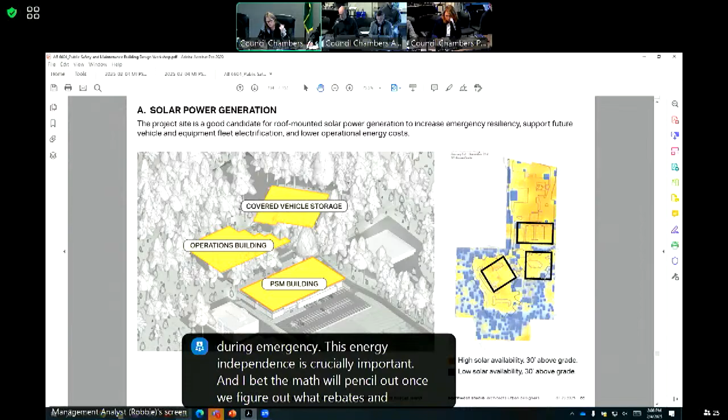Councilmember Weiker: I'll just say, having worked for an electric utility for over a decade, distributed generation is the future. Future-proofing this site for power outages we might experience in the region, especially during emergency - this energy independence is crucially important. I bet the math will pencil out once we figure out what rebates and incentives we can get, as well as the use and benefit beyond the buildings generating more power than they're using. So I fully support looking into this further.

Councilmember Weinberg: Yeah, just a +1 on what Councilmember Weiker said. This is an RC Level 4 building, which means when the rest of that island is down, this building is up. Having its own power on site is huge. So we shouldn't just be looking at what it can generate during normal times versus taking power from the grid - we need to make sure we can power these buildings even when there is no grid.

Speaking to level 4, when we had the bomb cyclone, we lost a lot of cell communication on island, on day 2 of the power event. And you had in your drawing the ham radio room, right? The ham radios tend to have a lot of antennas and roof needs. How have you factored that into the most ideal roof for solar, and the other appurtenances that need to consolidate on that roof? With respect to solar and things like rainwater harvesting, we've taken a loss factor to the gross square footage of the roof so we can account for things that need to take place up there, including mechanical spaces and equipment housed on the roof.

In terms of the future of policing, we've seen with LAPD AI drones going out to survey - a 911 call comes in and it goes straight to that call to get eyes on the situation and understand what resources need to be dispatched. Is there roof space that will be dedicated for that future in policing? Obviously a drone landing, maybe autonomously, needs an area that's extremely safe and devoid of people. Roof is going to be a natural spot for it, and it looks like your best roof, with a line of sight for takeoffs and landing, is that roof.

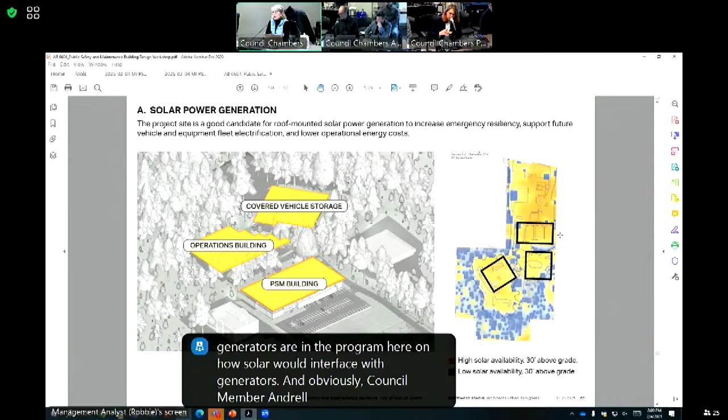To be determined. I think using both tools, if solar becomes an option, is a really great scenario. But in the end, we have to have buildings with lights on during the 7-day power outage, or the 30-day power outage in the worst case scenarios. So let me get back to you - yes, generators are in the program here - on how solar would interface with generators. And obviously, as you mentioned at the beginning, the all-in costs, all-in benefits, that ROI analysis is not done yet.

Just a follow-up question: do we have a choice of fuel yet on the generators? Is it diesel or natural gas, or is that TBD as well? That decision is not made yet. I figured that was more granular than where we were at this point, but I'd be curious about the pros and cons of those fuel choices.

When we do projects like this - it's been a while since I've done a building of this scale - but it's like thousands and thousands of decisions. So keep raising them, we're taking notes and remembering we need to come back and answer those questions. Right, it's like building a house, and by the time you're down to picking the hardware for the cabinets in the kitchen, you're just done. Done, yeah.

Councilmember Reynolds: for what it's worth, no surprise to anyone, I'm all in on the solar idea, but I wanted to make a couple comments. One is that the reasons to be supportive of solar are environmental concerns generally, and possibly economic issues - we'll find out when we see the numbers. But I'll concede it's not going to be a material resilience advantage, since most of our power outages are going to be in winter, and generation capacity averaged over the year will be a lot less in winter than current usage. And current battery technology, you'd probably have to fill one of those buildings with batteries to run them for more than a day. So we do it because it's right for the climate and the economy, but not for resilience, in my viewpoint.

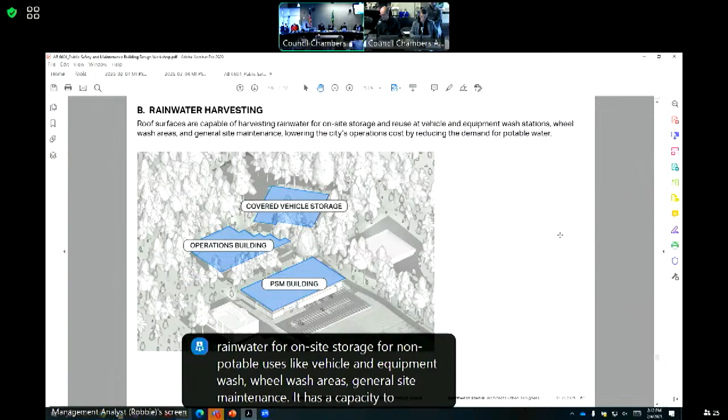A preliminary look at that harvesting. Just one example, we took a look at the operations building this time, rather than the main PSM building, to understand, based on its size and use cases, at a high level, what the operational monthly water balance would be based on harvested rainwater compared to non-potable uses, including vehicle wash, site maintenance, and non-potable flush valves, if it went to that degree.

What we found is pretty staggering. The blue areas highlight the water capture over the course of the year. The bright purple areas highlight non-potable uses for vehicle wash, cleanup, and site maintenance. The dark purple areas highlight non-potable use for fixture flush valves, of which there aren't very many in this building. When we looked at this preliminary read, we felt this was another item that might warrant further look, both in its life cycle cost and in terms of its potential operational savings for water use throughout the year.

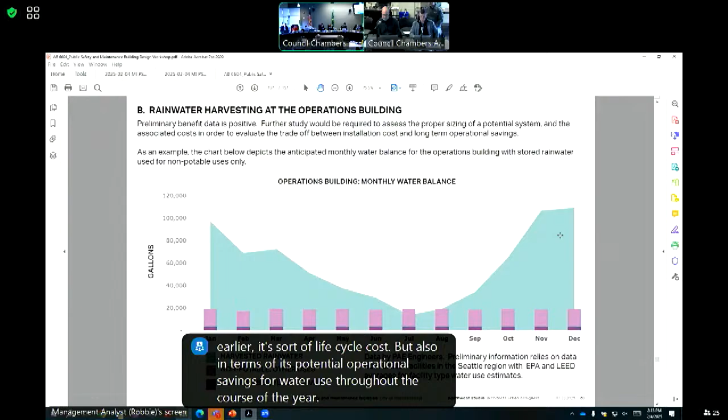When you do the solar seasonality, can you overlay it on this chart for me? Sure. And I think we also need to generate this solar capture by month, like we're doing here as well.

My first question would be, capturing what looks like a tremendous amount of water, and you mentioned the water courses and the natural water elements on the site. Does this have any negative impact to the function of those? We can evaluate that.

Maybe this is a question for Jeff. I thought that we didn't have code to support the use of this type of water in this way. Is this a new state-mandated use of water that people are allowed to do?

That's a good question. How about that? Yeah, that's a good question. I'll want to look into that a little bit with Gareth, our building official, and talk to the gentleman here, Aaron, from Northwest Studio. So we may be considering a technology or a use that potentially our code doesn't quite support.

Mayor, I have an answer to that. Since 2009, the state has allowed use of rainwater collection for non-potable uses. I've talked to Gareth, and he's confirmed that our code does include plumbing code provisions that allow for the collection and distribution of non-potable harvested rainwater for those purposes. Excellent to hear. Anybody else? Councilmember Whitaker, fully supportive of this initiative as well. All right, not seeing anything further.

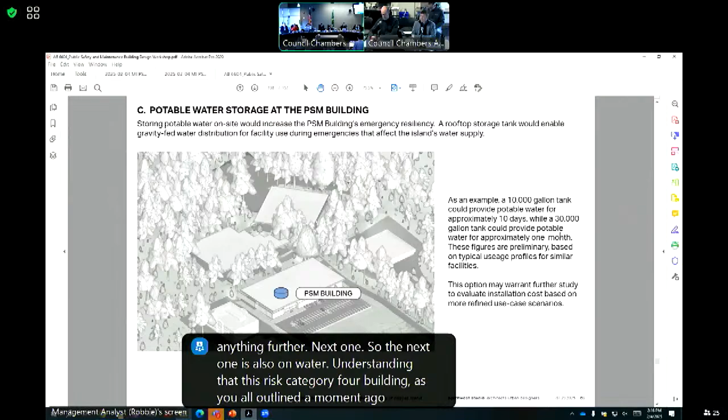Next one is also on water. Understanding that this risk category 4 building needs to continue operating for a period of days when the electricity grid may be down, likewise, water supply can also go down. One of the potential inclusions brought up by our consulting team was considering potable water storage on the roof of the PSM building.

In this case, we've talked about two use cases, a 10,000 gallon or a 30,000 gallon tank, depending on the number of days the building might want to function without water from the city system. The rooftop storage tank enables gravity-fed water distribution for facilities, so not really requiring pumps for the use of water during emergencies that might affect the water supply.

The preliminary look identified that a 10,000 gallon tank could provide potable water for select fixtures in the building, scaling down usage to accommodate about 10 days, while a 30,000 gallon tank would provide that use for about a month. These are really preliminary, based on typical use profiles. We'd have to drill into this with more precise use profiles for police department shifts and other activities in the building during emergency operations, when quite a large number of people might be using the facility.

All right, Councilmember Jacobson. With respect to potable water storage, is there a time limit that one has to use that before it's... or can you keep it up there for months or years? I don't know at this point. I'll have to get my consultants to follow up with us and provide you an answer.

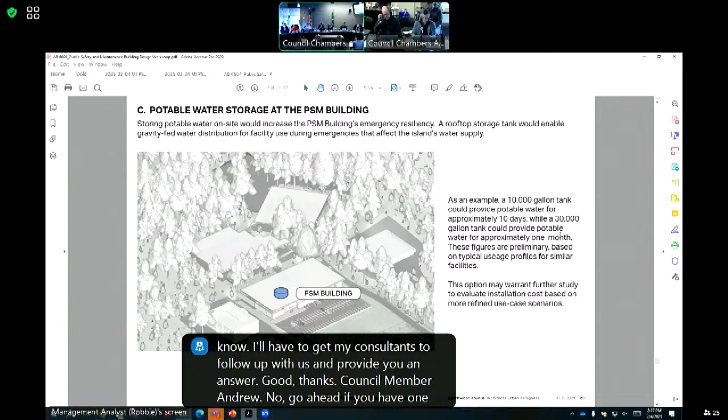Good, thanks. Salim, I have a question too. Councilmember Anderl, no, go ahead if you have one. I was just going to ask some questions about the pressurization of this and just storing it on the roof. So you're suggesting storing it on the roof allows you to have no pumps and then use the plumbing fixtures in the building.

But there's certain fixtures that wouldn't work, right? Like in a typical institutional bathroom, the toilet flush valves require a good amount of pressure. So part of including potable water storage on the building, if we're looking at gravity-fed systems, involves looking at the fixtures that would be fed by those systems in the event of an emergency.

I appreciate your question, because it highlights that this isn't a standalone piece. It comes with other considerations.

Why not just pressurize it so you could use everything? That's something we could visit with our consultants about. And then if that's the case, why not put it underground?

Mr. Mayor, would it be cheaper, maybe, to put it on the ground instead of on the roof because of the weight-bearing part?

I'll tell you, when Northwest Studio presented this to us, I went, water on the roof, little PTSD. This is why we're having this conversation.

Well, I think you and I are in the same boat. I guess I should have added, I don't want a living roof and putting 30,000 gallons of water up there.

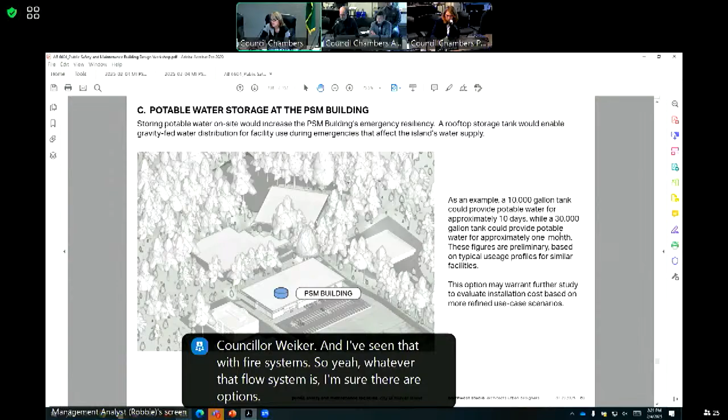Was that Councilmember Weiker? Yeah. So I presume we're not the first city to try and design a water storage system for both fire suppression and long-term storage. I presume there are some standard solutions out there, including tanks that actually circulate the water, so it doesn't just sit there for years, but gets used that day and refilled like our reservoirs do. So I presume this is all very doable, it's just a matter of finding the right way to do it based on what precedents are out there.

Councilmember Anderl: Yeah, so it's 250,000 pounds. I saw Craig do a little head fake when you said it doesn't add much to the vertical strength required for the building, and I kind of internally flinched a little bit myself. But I'm going to trust the architects and engineers on this one, it just does seem like a lot of water.

And if we were to do this, it would have to be fail-safe, in my opinion. But I have a question about what is required to be potable and what is not.

Would we have to have potable water for the people who are showering, or could that be rainwater? Is there a way to put a purification system in that's cost-effective, where we could purify the rainwater to make it allowable for use in some or many fixtures?

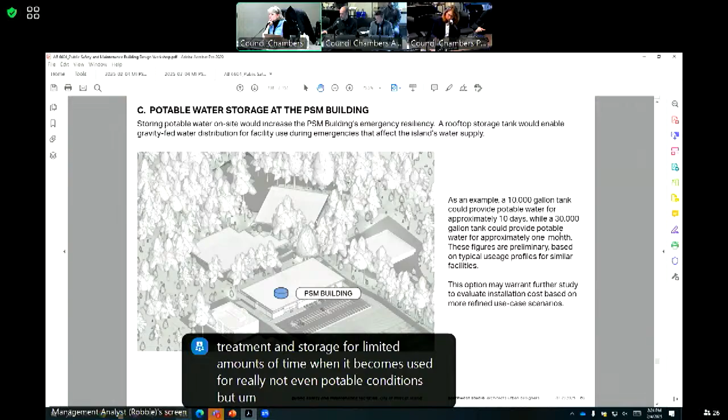One of the reasons we initially targeted rainwater for a lot of the non-potable uses is because that's the simplest system for reuse of rainwater. Stepping beyond that requires filtration, treatment, and storage for limited amounts of time when it becomes used for not even potable conditions, but other uses inside the building. Even capturing it for flush valves begins to require that kind of uptick in complexity.

Okay, thanks. What we can do as well, maybe at the next meeting, is have PAE join us, and we can talk a little bit more in detail about the mechanics and the options we have. Okay, not seeing anything else, we'll push forward.

So the next item is something we'll continue to look at, which are the structural systems for the buildings and weathering covers, because as you all probably know, that is a big cost driver for a lot of buildings and a lot of structures.

That selection of a system is based on an incredibly wide range of factors, including site conditions, some of the functional requirements, the facility type needs, load and seismic analysis, material availability, environmental impact, building codes, system costs, and trade conditions and sources for raw materials.

For review, the factors above are consolidated into 4 overarching conditions: the applicability for a risk category 4 structure, just so we can make sure it's compatible with what you need to construct; achieving the spans required for efficient layouts and use; the overall cost of the system; and other considerations like alignment with climate action plans adopted by the municipality.

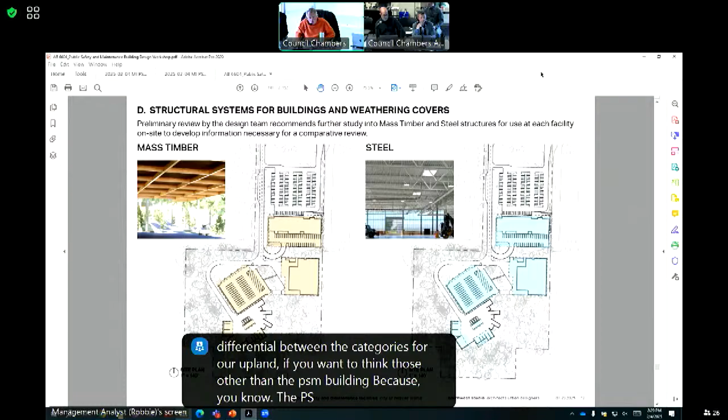Have we looked at the cost differential between the categories for our upland buildings, other than the PSM building? Because if the PSM building is still standing after the seismic event and the others aren't, we're out of luck to some degree, and it affects our ability to react. So I don't expect an answer right now, but the cost comparison between upgrading the upland buildings to category 4, so they're at maximum resiliency, assuming there are no more categories, would be of interest to me. I can actually speak to that - currently everything on site is being designed and estimated as risk category 4 for that reason.

Good, thank you. Councilmember Weiker - to follow up on that, can you mix and match the two depending on where they are and how they're covered? Like find the cost benefit and the climate action benefit? Absolutely.

Not seeing anything else. The next item is also related to structure. Now, we mentioned that concrete was the more expensive of the options to pursue, however it does provide different benefits. When we look at one of the lower yard structures as an example, this is the covering over the western side of the lower yard, which provides cover for vehicles and equipment.

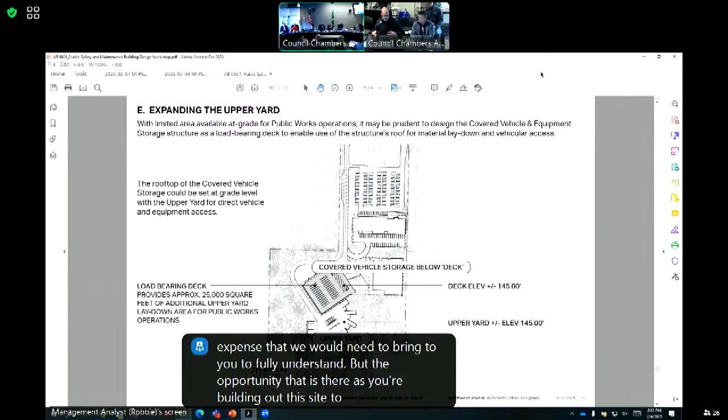One of the things we've discussed with Public Works is that should that covering be converted to a concrete structure, it begins to have the capacity to become a load-bearing deck, which opens up opportunity because it's at grade with the upper yard, to translate into about 25,000 square feet of additional upper yard laydown area for Public Works operations. This is obviously not without expense that we'd need to bring to you to fully understand, but the opportunity is there as you're building out this site to create over 20,000 square feet worth of usable area that otherwise wouldn't exist for future operations.

Aaron, before we take council questions - this is kind of that 30, 40, 50-year horizon where we're looking at capacity. I know you all have talked about what would we use the roof for. Can you share some of your off-the-cuff ideas just to get the conversation flowing?

Yeah, as you walk around the current yard, what you'll see are light poles, pipe, park benches, a lot of outdoor equipment stored in a kind of ad hoc way on top of other structures or in grassy areas off to the side. So there are a lot of surplus items waiting to be reused - items you've received that are longer, heavier, or bigger than you might store inside the warehouse, that we've reserved space for in the upper yard. Long-term, we need to understand what future-proofing of that area might really need to be. We need to do further work with Public Works to project that and understand more what those uses might be, but that's just one example.

Councilmember Jacobson: With respect to the lower and upper yards, do we have a feel for how good our subsurface soil conditions are for foundation purposes at this point? We have not done any geotechnical work at this time.

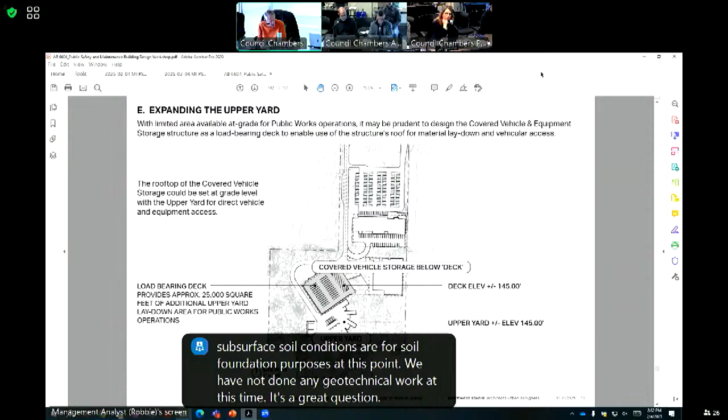That's a great question. The other comment, less a question, is - I have an assumption there's going to have to be some grading done in the lower and upper areas, the extent of which we don't know at this point. But if we had to do some grading and wanted more horizontal area available for something else at some other point in time, the incremental cost of additional grading to give us that extra capacity might be a good investment in my mind.

Let me make one other comment, going back to something you said earlier. Back in another life, when I was a lawyer, I represented most of the roofing contractors in this area, including the 2 or 3 largest ones. I once went down to one of my client's projects where he was re-roofing schools, almost all of which were flat roofed. I was looking at it and said, hey Wayne, how come it looks like you're actually changing this into a slightly sloped roof?

He said, yeah, we're doing that, and the architects and engineers will never notice, but we'll also never have any callbacks because the water will drain out. I don't know if you've designed that in there so that instead of going down, water goes sideways, but something to bear in mind, particularly since we're having some fairly large flat roof areas on this project, and water will find its way out.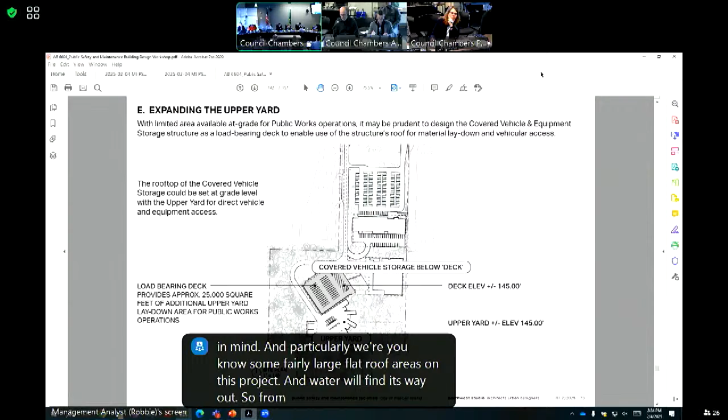So from a design or operational perspective, does having that upper deck as parking add a whole lot of columns to the lower level that wouldn't be there otherwise?

The idea behind having that upper deck would be primarily material laydown, but it would require operation of heavier equipment on that, to your point, for drivability. And yes, with a concrete structure, the columns would need to be more frequent, and it would require load carrying capacity for those activities.

One of the things we can do for the next meeting, Councilmember Jacobson and Mayor Neese, I think you're both heading in the right direction, is look at where on the ground we have additional room, if any, to make more space for laydown storage. What does that look like? We're constrained by critical areas in the back, so we can analyze that, and then do some trade-offs, because storing on that roof is going to be pretty considerable cost. But this is the moment where we're making decisions for that future council and administration to possibly have additional capacity, so we need to look at whether there's more room in that back property for additional laydown, and analyze the costs of enhancing that roof for additional use.

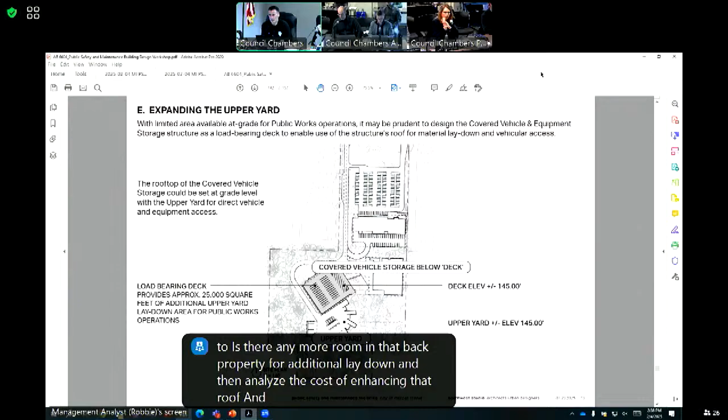I'd also encourage you to think about racking solutions in the limited space you have for long poles, light poles, traffic signs, things that could be stacked vertically in a more organized way, which would give you a bit more capacity on the ground that you don't have.

That's great. Okay, what's next? We're almost there. Two more items. The next is actually the roof extents of the public safety and maintenance building itself.

The schematic design currently includes a roof, shown on the left, that covers the PSM building and covers the MIPD vehicles on the northern side of the parking lot, the official vehicles, of which there are 23 spaces, and then 11 spaces on the southern side, which are reserved for staff vehicles.

One of the things we're looking at are potential cost savings in the roof structure based on different areas. On the right-hand side, you can see the diagram of covering the building and the official vehicles, but not necessarily the staff vehicles parked in that secure area. We're going to continue to explore some of these reductions, but wanted to highlight this as one of those early value engineering considerations as part of this conversation.

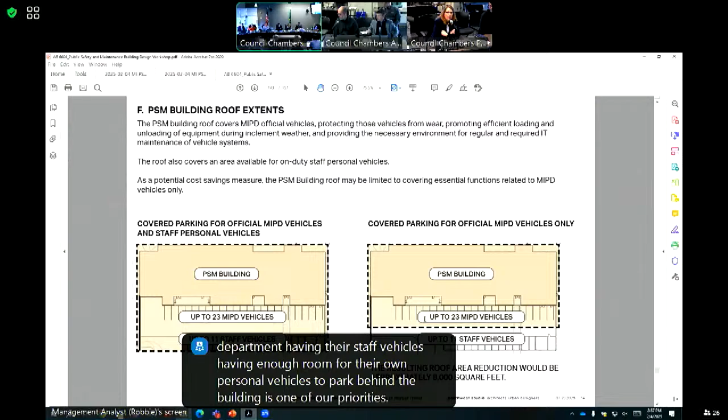One thing I want to call out here is for the police department, having enough room for their own personal vehicles to park behind the building is one of our priorities. That's because if a vehicle is going to be targeted, it's potentially their personal vehicle. We've experienced that on the island. So that's what you're seeing - all the PD vehicles and personnel vehicles would have access to that back secure parking lot.

From the police tours I was on, full roof coverage is extremely important, covering that full police vehicle bay. I also think you might want to talk to IT about how they're in and out of those patrol cars supporting that equipment, because that half roof, depending on how wind and rain interact with that space, may only be half dry, and they're working in and out of patrol cars with doors open. It might be much less than ideal, but having full coverage will give security as well as operational benefits.

Mr. Mayor, I'm glad you highlighted that, because in our early conversations with IT and police, that was actually one of the drivers for the covering here - their frequent need to access the vehicles out in the lot and service them. So I appreciate you.

Yeah, I don't see keeping us focused on anything other than that. A service bay for police vehicles, so it's not going to be done out in the elements.

Anybody else? I just wanted to say I'm supportive of as much covered parking as we can possibly afford, because it's going to reduce maintenance costs. We won't have to deploy our snowplows into those parking lots, and we'll extend the life of vehicles, both staff and city. So, I guess we should probably try to do a cost-benefit analysis on this, like I ask for everything else, but I'm a big fan of covered parking.

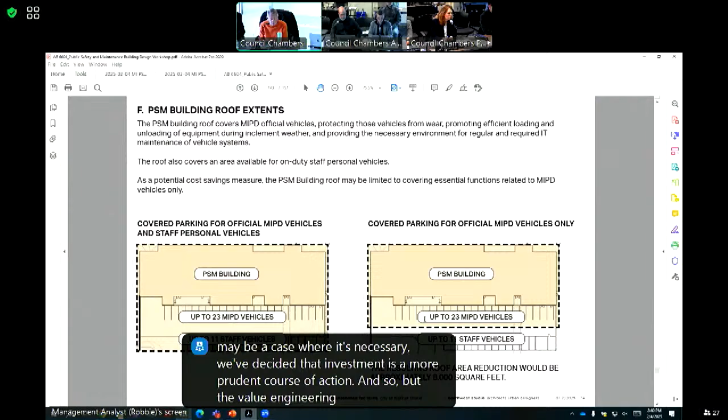I'll mention this in passing, and this is not a passive-aggressive dissent from what the mayor and Councilmember Andrel have said about covering it. But I'd like to commend you, Aaron, and your group for looking at value engineering, because in the end we have to go out to the public, and all seven of us have to be on board with the fundraising part of it. One of the things we have to assure our colleagues is that we've squeezed all the excess out of this, but where necessary, and this may be a case where it's necessary, we've decided investment is a more prudent course of action. The value engineering part is extremely important, particularly imbuing that on whoever the GCCM is down range on this.

Let me add a little bit of color from the tours I went on. One of the North Seattle sites had a parking garage right next to it, overlooking the Sally Port. The Sally Port was open to the elements, and the parking lot was open to the public. This created a significant operational challenge for the police, since that's where people know they're going to be. It was lit up at night for operations needs, and it created a kind of overwatch scenario where the public had a clear line of sight into police operations. It really did impact officer morale, safety, and things like that.

So I do appreciate the value engineering comment. I don't want anyone to think my comments were flippant about a full roof, but I heard a lot of comments. When I disagree with Salim, I'll just tell you.

How's that sound? Fair enough. If that ever occurs, all right.

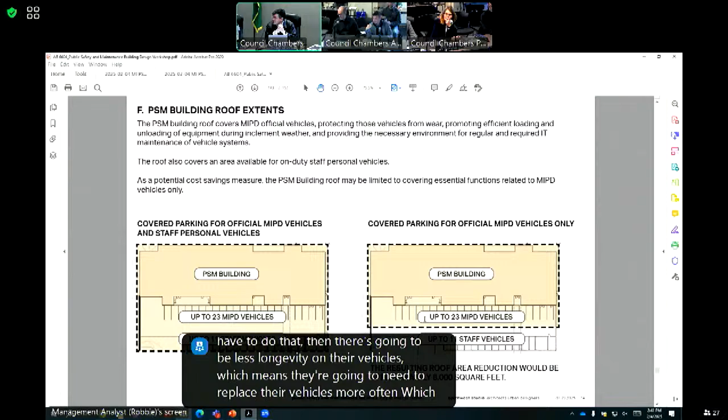Councilmember Weinberg: Also supportive of a full roof. I think that pulling the roof back and exposing our staff's personal vehicles to the elements to save money would impact morale. It's just the wrong thing to be saying to our staff—we should be respectful of their vehicles. If we do have to do that, there's going to be less longevity on their vehicles, meaning they'll need to replace their vehicles more often, which would need to be entered into the next negotiation with their union. So I think we should do the right thing for our staff and have a full roof.

Okay, not seeing anything else. The last item is a discussion of a potential parking garage at the PSB building itself. As we mentioned, we were holding an area of about 120 spaces north of the PSM building in early planning. Of those, about 80 spaces would really be required for building and facility staff parking.

That would create approximately 90 covered spaces, subtracting for building cores, access, and other things. It would shift that parking lot from fully north of the building to slightly under the building, requiring less space north of the building for public and staff parking. It comes with a considerable cost, though—we're constructing an entire floor of fully enclosed parking structure, so it comes with all the ventilation and fire protection requirements, and it begins to affect the public lobby and other access conditions.

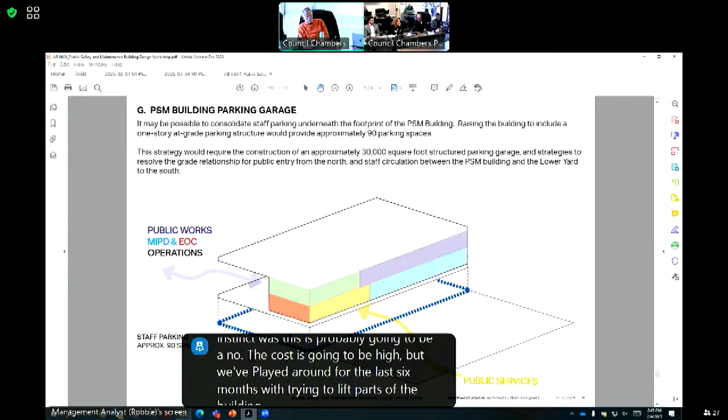Before we get rid of more of your guys' brain cells, I think we ought to do some jungle math on the ROI of this whole thing, costs and benefits, because I think you can get a big number to do it. When the trade-offs come, we're gonna have to trade stuff off, and I have a sense this would be a trade-off early on to make this project affordable, but that's my opinion. Our gut instinct was this is probably gonna be a no, the cost is gonna be high, but we've played around for the last 6 months trying to lift parts of the building, and we wanted to show you that it's possible.

Could you flip back a slide? I think the council is aware that we're reserving the front part of this property for a future use that's not determined yet. So one thing to consider is that if the city were to need to add a building to the front of this campus, that building may require structured parking because we may not have enough room. That's not necessarily a problem for today, but those are the puzzle pieces we've been working on behind the scenes for future planning. On the other hand, you have enough room on this campus for surface parking, for sure, based on the original plan we presented earlier.

I didn't mean to cut you off, Mr. Mayor. No, you didn't. Councilmember Weiker.

Taking that into consideration, I think this is mostly an internal building with internal use, and at this point in time, needing to go ask our public to support this in the first place, this is an easy one to take off the list of things to evaluate for me.

Functionally, we prefer the on-grade design. It really works better. There would be a lot of acrobatics to lift this building and do all the things we showed you earlier. We know we can do it, but we do like the way it's flowing right now.

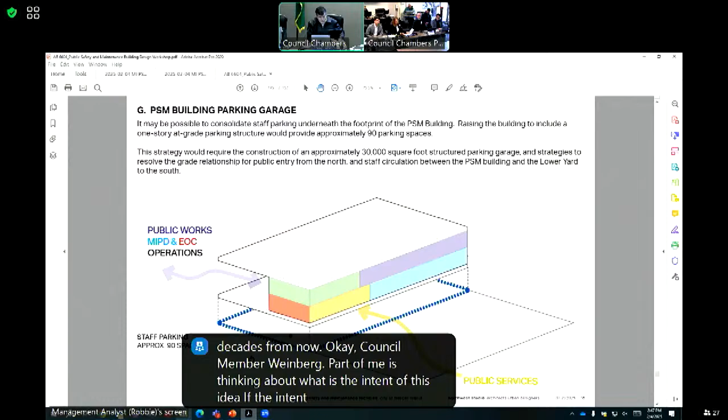Part of me is thinking about what the intent of this idea is. If the intent is to provide covered parking, or at least less exposed parking than what we have out in front, I wonder whether there's a far less expensive option, such as leaving the building on grade but having solar panels over the parking spaces, because that front part of the lot gets a lot of sunlight. It's really the orange part of the solar design you guys had. It might also enable us to make those chargeable spaces as well, because it gives a source of power right there that could be used for it. So it can serve a couple of purposes - protecting the vehicle and leveraging some of the energy coming to the site that people would otherwise use running their air conditioners to cool off their car if they didn't have the cover.

So just so I'm hearing you correctly, what you're asking us to look at is that front parking lot, staff parking and public parking, putting a structure over that, and also solarizing it? Well, having a canopy over the spaces - it doesn't need to be a roof structure that people can walk on. It's just something that essentially protects the cars from overheating and also can capture that energy and possibly turn it into electric vehicle charging.

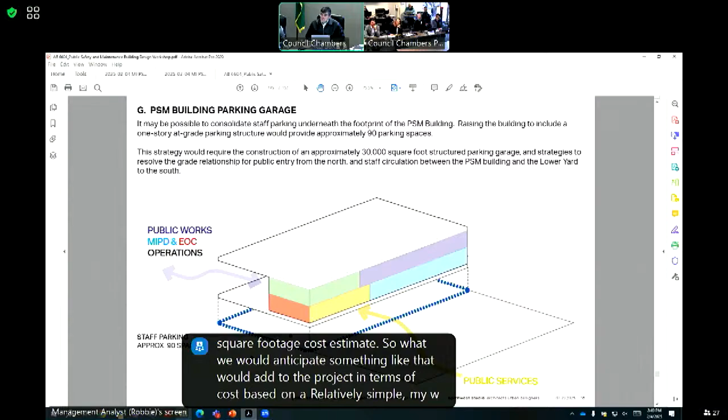I think it would cost a lot less than lifting the whole building. So there's another option—what we could bring back is a square footage cost estimate, what we'd anticipate that would add to the project based on a relatively simple square footage analysis. We'll add that to our list. It might be that we don't cover the whole parking lot, maybe half of it or some fraction, to figure out what's cost effective.

Councilmember Anderl: I want to say that when we were talking about building a structure on the Tully's property, I remember discussions about the cost per space of underground parking, and it's pretty breathtaking, honestly. I'm in favor of as much covered parking as we can afford, not on an unlimited basis. So I don't think lifting the building is a non-starter for me, but I don't know if more information comes out. I don't have enough information to know whether I'd support Ted's proposal, but I get that a roofed structure with no walls would be a lot cheaper and maybe provide some of those benefits.

Thank you. Just for clarity, Ted, I think I'm hearing build a roof with solar panels, not build a roof to put solar panels on—is that your idea? Yeah, actually I was using the word canopy to imply it's not really a roof, just something for the solar panel only. I've seen structures like this that aren't a continuous roof, just solar, and some that are a roof with a solar panel, but it doesn't need to connect over the entire lot—the drive space between cars doesn't have to be covered. Okay, so you get the picture.

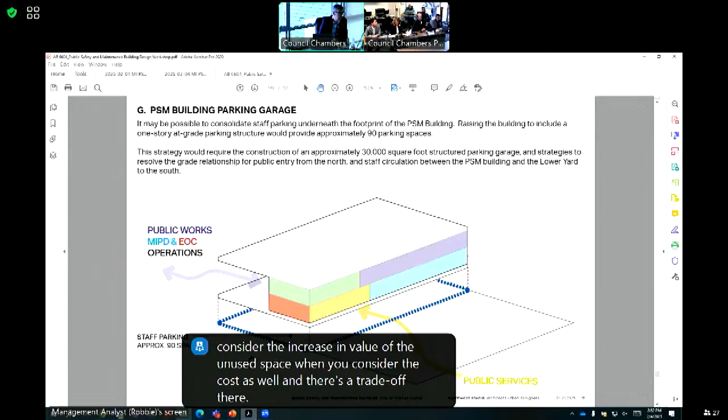Yeah, but on balance, if it's multifamily housing and you have a 9 to 5 municipal operation, the opportunity for shared parking is extremely high—those folks tend to leave, then those spots are all empty. So I agree, worthy of analysis as well, yes. A lot of opportunity there. All right, anything else, council?

All right, let me bring it home then. In your packets, the next few slides are labeled appendix, and we're not going to go over these today—these are your floor plans, more detailed floor plans with labels. My caveat as you're looking at these is they will change; we'll be meeting with staff, and I fully anticipate things will move around between now and the next time we come see you based on their feedback. But we wanted to give you a chance to look at all of those. I'm going to have Aaron drive the slides for me—if you could flip forward to the cost estimate. Yep, next slide please.

This is going to be very quick, and then we need to get to the water supply pipeline presentation. Council, we knew we were going to be cutting it close on getting that preliminary cost estimate to you, so thank you for your patience. We amended your council packets yesterday—I think I emailed you Friday with the ballpark number. So what we have is a preliminary cost estimate based on the information we just shared, which is not a complete design yet, it's a concept drawing. I won't get into any more detail about the cost estimating; if you have questions, we can talk after the meeting or at your next check-in.

He gets things squared away. I'll just quickly go over, we have 10 or 11 slides here today to talk about, to provide an update on the water supply project, including some background, the new water supply alternative location, as well as the additional project background. We'll talk about the alternative service delivery, and then finish and conclude with some next steps and council questions and discussion as we lead into our conversations with Seattle Public Utilities.

Maybe skip to the third slide if you can. All right, perfect. So I'll remind the council and the community that over the course of the last two summers or springs, we've had multiple emergencies within the water system. Both happened in the month of April, began the month of April. Completely unrelated, but both impacted the existing water supply line that the city receives from Seattle Public Utilities.

After the first emergency in 2023, the city undertook, partnering with Confluence Engineering, an evaluation to develop an action plan to build resiliency and reliability within our water system. That work was well underway in 2024 before it took a backseat to the previous water emergency in 2024 on the existing supply line.

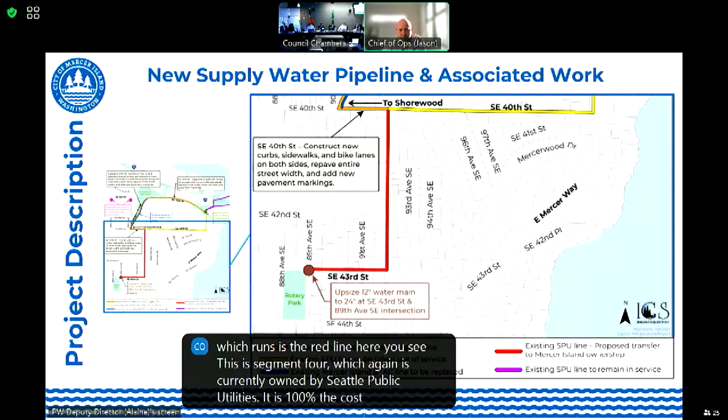The other piece of this project is segment 4, shown here as the red line. This segment is currently owned by Seattle Public Utilities, and it is 100% the cost responsibility of the city per the SPU contract. So one of the discussion points today is that, although the city would move forward with building this new supply line, segment 4 is still currently Seattle Public Utilities ownership, it's their asset even though the city pays for it. Staff and the design team recommend moving forward with transferring ownership of that asset to the city, but that's a consideration and discussion point for council later today.

Additionally, on the bottom left-hand side, there's an upsize of a 12-inch water main to 24-inch proposed at this intersection, to help with hydraulic modeling and pressures associated with this project. Next slide.

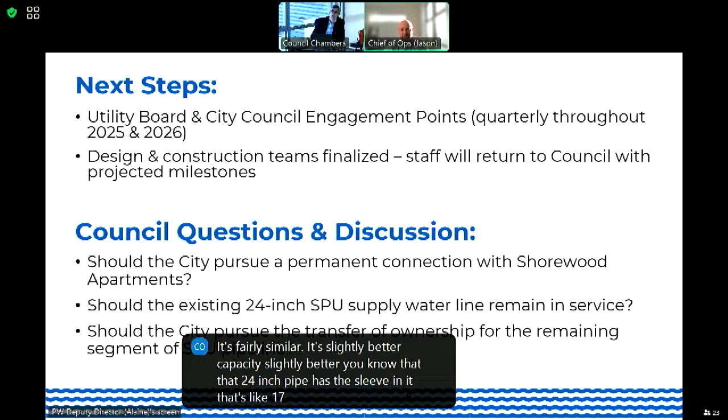And the other line, the 24-inch line that currently has the sleeve pulled through it, what is its capacity compared to the 16-inch line? It's fairly similar, slightly better capacity. That 24-inch pipe has a sleeve in it that's like 17 inches and change, so it's slightly better than the 16-inch line. But the 24-inch proposed for the new supply line is markedly better. So if we're comparing the two as backup line options, the 24 that's really a 17, or the 16, they're pretty close to each other, but the 24-that's-really-17 is much more unreliable because of the slope and construction and everything else, right?

Correct. Okay, that seems like a no-brainer then to me to decommission that line. All right, thumbs up on that. All right, you got 7, Jason.

All right, next question. So the last piece is that—Elaine, maybe go back to that slide that shows segment 4. With the construction of the new supply line that comes to the top of Gallagher, one more slide back, I think. Yep, there you go. So this, oh, you're right there. No, go back one more slide. Perfect, thank you.